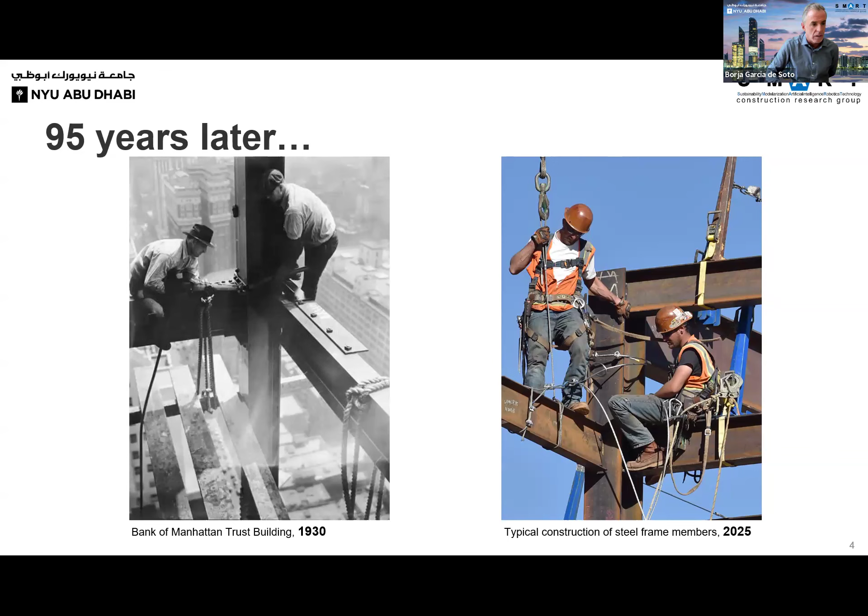We're also seeing other factors that are accelerating these changes. I guess you're all familiar with what's happening, particularly in Europe and developed places, where the workforce is declining quickly — we are running out of workers. And to be realistic, construction is not that appealing anymore. We are falling behind other sectors, and younger generations are not that interested in going to construction sites. They're very hard work environments — tedious, dangerous. So we're seeing a decline in population, but also a decline in interest.

There is now this concept about how we can modernize civil engineering, construction management, and so forth. Technology is playing a significant part, but still we need to be conscious about what the implications are in the long term and how we can compensate for that potential gap.

We're also seeing, as in many other industries, labor cost skyrocketing, and at the same time, like with most technologies, the price of technology goes down, particularly the price of robots. In the old days, if we look back to maybe the 70s or 80s, Japan was one of the pioneers of robotized construction sites. The main challenge they had was timing — it was very expensive, and the technology was still not quite fully developed to robotize, despite the efforts they had made in this regard.

So now we are in this perfect storm, or this ecosystem, where we have high labor costs and low robot prices. So now we start thinking, particularly on the construction company side, does it make sense to start looking at ways to robotize my workforce for things that could be relatively straightforward to do, like data collection and progress monitoring, for instance. That is actually the main axis of research that I work on, and we're trying to really put this into practice in real construction sites.

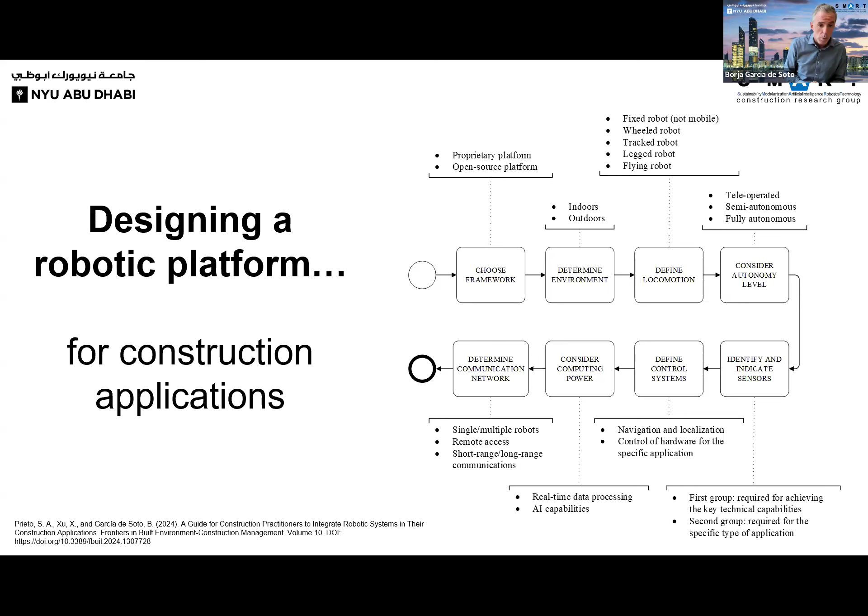It's important to have a good understanding of the complexity involved across the different levels of communication strategies you might want to consider for your platforms. So, starting with the bottom layer, we have the hardware component—we talked briefly about that. What type of platform are you going to use? Indoors or outdoors, meaning terrestrial robot versus aerial robot? Legged versus wheeled? What are the limitations regarding the current state of implementation? And what type of sensors are going to be used?

Is it going to be a 3D laser scanner that is going to be continuously registering the environment as you're moving, or do you need to predefine waypoints for the robot to go and collect data?

What about the IT network? How is this going to be connected with the overall network of the organization, with the network on site? We know there are limitations on construction sites at the beginning with regards to connectivity, depending on location, depending on the status of construction and so forth.

Then you need to integrate all that with the actual brains, if you will, of the robotic platform. Typically, we're using ROS, Robot Operating System, that allows you to integrate different elements from the actual payload that is added to your robot, in this case a 3D laser scanner, but it also includes all the sensors that are built into the robot for navigation and so forth.

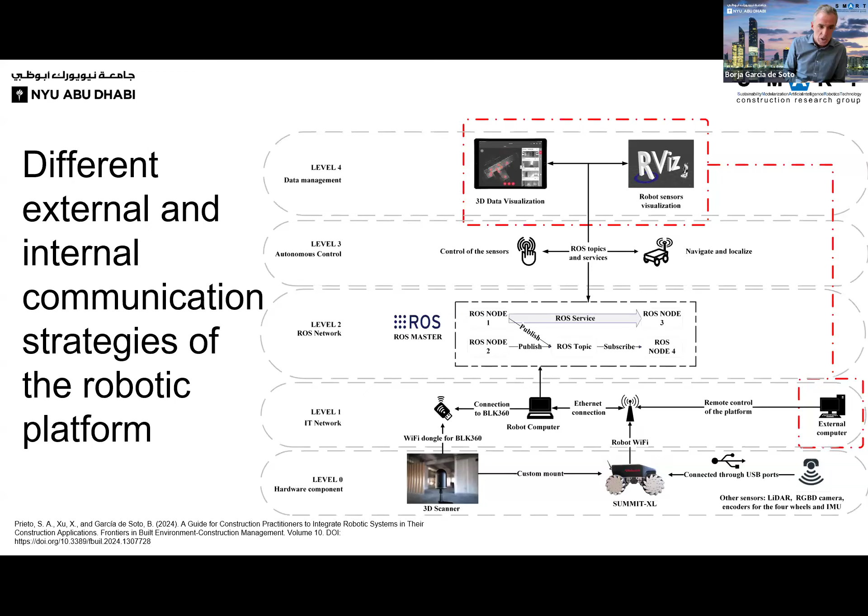So let me just give you a quick example of some of the prototypes that we're dealing with. With regards to the payload, we need to deal with both the navigation components. So we need to ensure that we have the proper mechanisms that allow us to understand the environment where the robot has to go through, but also that we have the ability to add whatever systems or equipment that can capture data that can be further processed.

Here on the left side, let me just use the pointer, maybe it will be easier. So basically we have the navigation component. We have a LiDAR that allows us to use and employ traditional SLAM mechanisms or SLAM techniques for navigation and localization purposes. We have a very modular and workable structure or framework that allows us to change things quickly. We want to have the ability to have a modular approach and add and remove payload, and by payload I mean the sensors that are required for our particular application.

In this particular case we'll be using a 3D scanner, but this could be a static one in the sense that you might have to stop and then collect the data, or you could have more dynamic ones, like this Hovermap, that allows you to continuously monitor and capture and register data. Of course, there's a trade-off with the noise that you might have to deal with later on. But the point of this is to allow you to understand that you have a lot of flexibility to modify and change your platform to complement whatever needs you have, in the same sense that you would if you had an operator or a human collecting the data in a similar fashion.

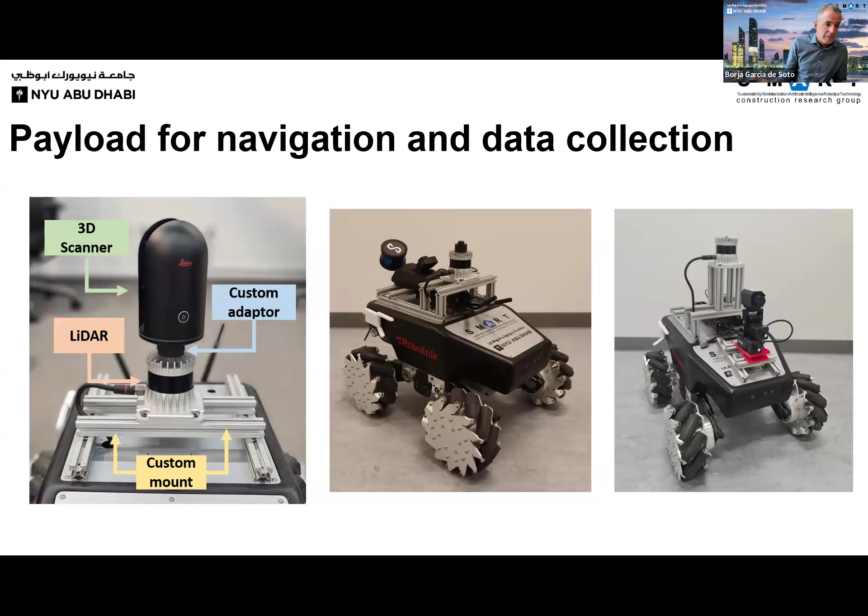With regards to mobility, this is a big challenge. You might be questioning, okay, but how is this going to navigate through a chaotic construction site where you have workers around, you have scaffolding, you have temporary structures, you have temporary storage areas? So it's not trivial to have these systems moving. Of course, more fundamentally, there are limitations with regards to mobility. And that's when we start to think, okay, are we looking at a wheeled platform?

Or we look at a legged platform, right? You can see the advantages and disadvantages of each. Here on the left, the holonomic platforms allow you to navigate very narrow spaces. The rotation perspective is relatively phenomenal, but you cannot climb stairs, for instance, or you might not be able to interact with the environment, like in the case of the image on the right, where you have a robotic arm that you can use to move things around if needed.

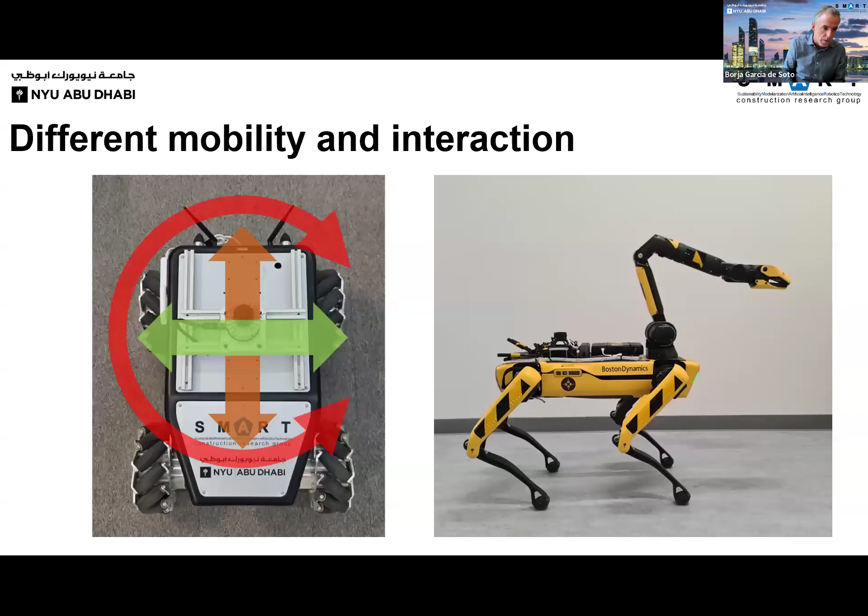So you can think of these platforms as additional workers, as I mentioned before, each with their own skill sets and abilities. In this context, you can start thinking of multi-agents, the same way you go about defining your crews, defining the type of task you're going to be doing, and then selecting the team members for data collection, surveying, monitoring, whatever it is. You can put it in the perspective of calling them agents, and try to see how we can integrate and create these systems.

So you have these multi-agent systems that, for example, in applications for inspections or project monitoring, you can customize and define the different agents depending on the payloads you're interested in. For example, Agent 1 will be able to collect data through a laser scanner. Agent 2 will be able to interact with the environment as needed, remove obstacles, and facilitate the performance or mission of the other agents.

And of course, another agent could be us, could be humans, right? We are not going to be completely replaced yet. We need to be in the loop to ensure that whatever these other agents are doing, similar to a manager perspective, we provide the final decision about the process. All this needs to be integrated and properly communicated, and this is also when human-computer, human-machine interaction starts to become important - not only understanding the capabilities and skills of the different agents, but also the payloads and the different equipment and sensors they are dealing with for particular applications.

Let me show you very briefly an overview of how this would look like. We are currently doing experiments to investigate the use of exploration algorithms, in the context of how we can navigate environments without a lot of prior knowledge, and how we can use this in a multi-agent configuration where each agent has a specific mission to accomplish.

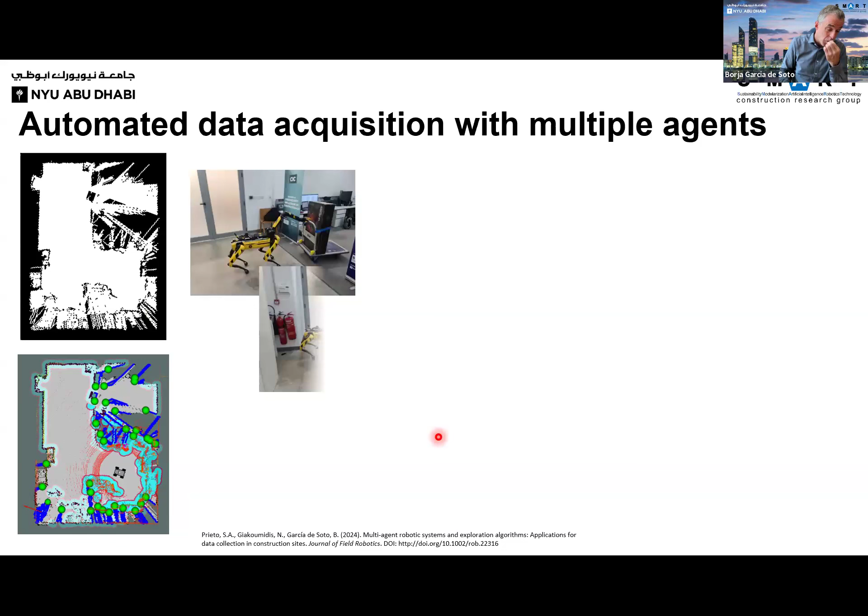At some point, this robot's mission was to map and digitize the whole environment in 3D, but there's an area it cannot access. So without any human intervention, you could have another robot that would help understand what issues this robot is having not accessing this space, have humans confirm what action needs to be taken, and then go assist the robot, remove the obstacle, so this robot can communicate, provide complete information, remap the environment, and achieve the final goal, which is a 3D representation using a laser scan.

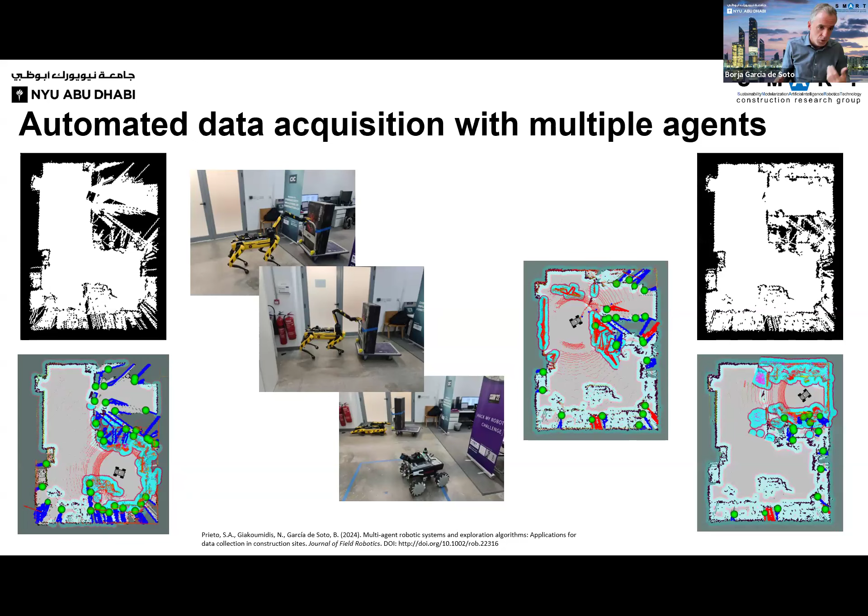I will show you a quick video of how this was done. This is in a controlled environment. We have a paper published on this, so if you're more interested, you're welcome to take a look at it. I will quickly run this video, see if it works.

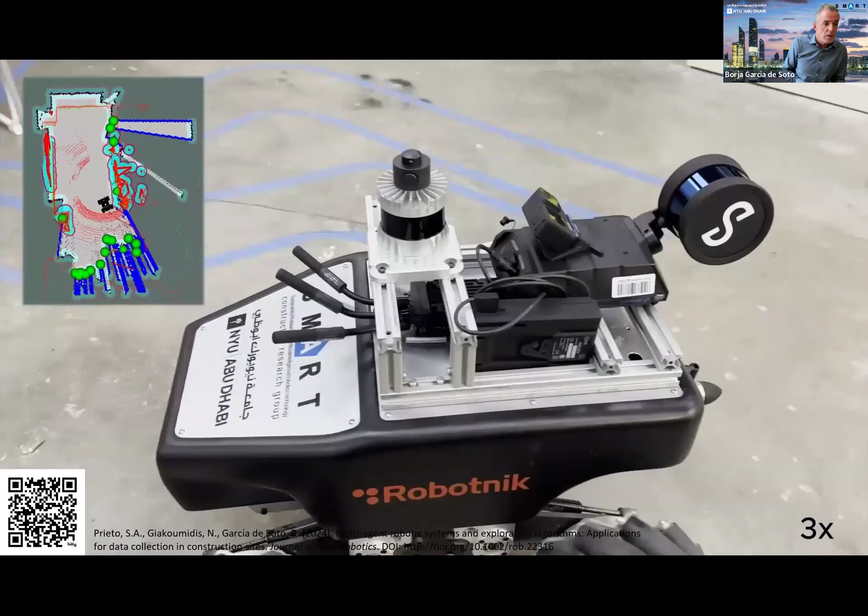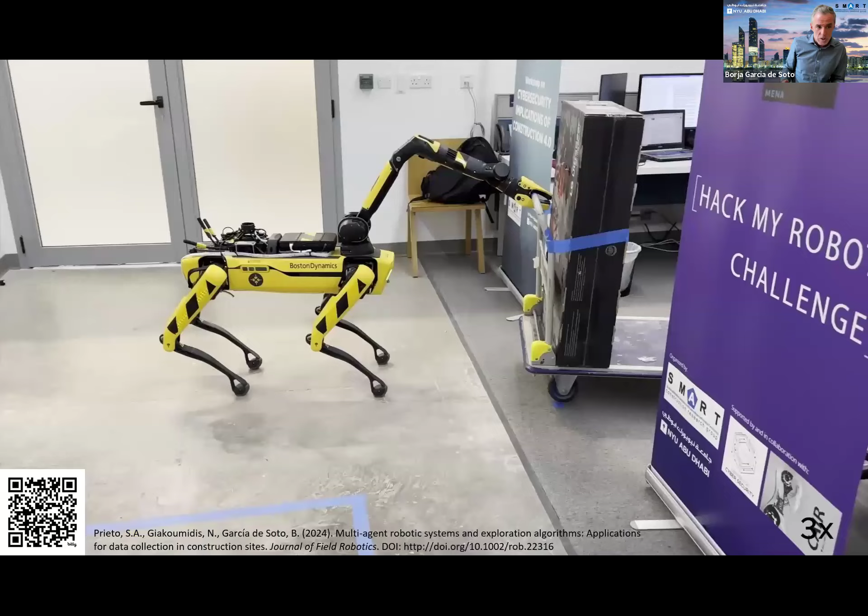Here you can see the robot. This agent is specifically designed to get the point cloud data. At some point, it reached all the spaces that were able to be reached. However, it was not a completed mission yet because the complete area was not finished.

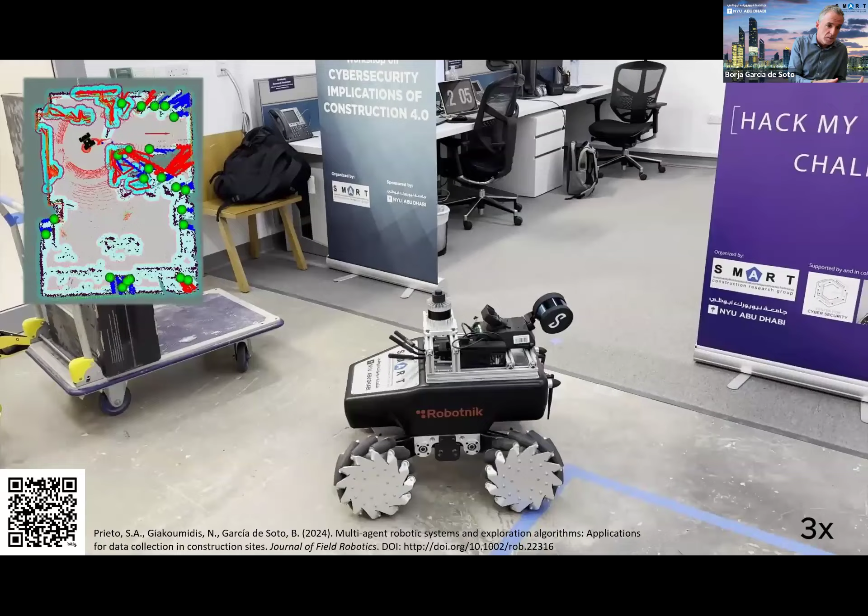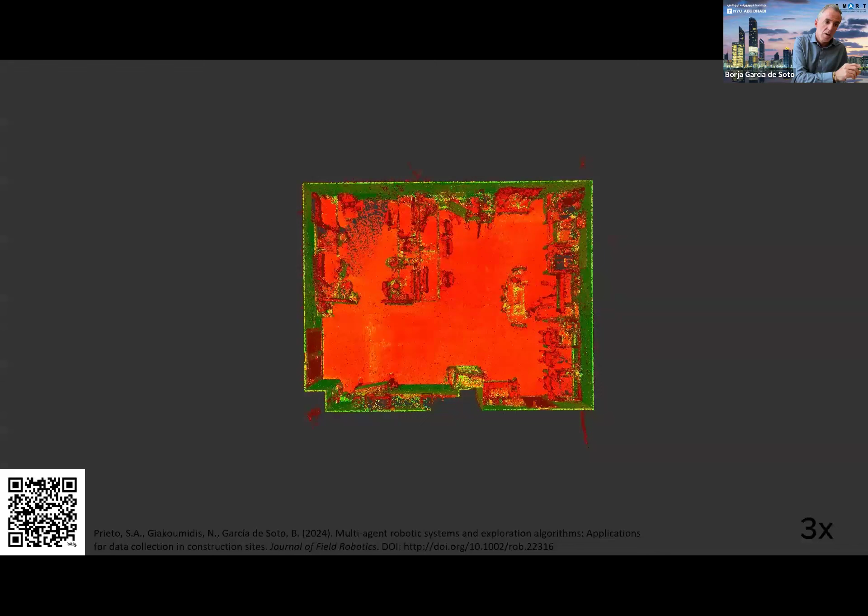What happened there was that it communicated with the other robot that had the ability to interact with the environment, and that robot was sent to the location where the obstacle was placed. A human remotely, in the same place or a different location depending on connectivity, was able to confirm and provide commands to the robot with the robotic arm to interact with the environment, move the obstacle, provide information to the other robot to complete the mission, and then that robot went back and remapped the environment, completing the assigned task.

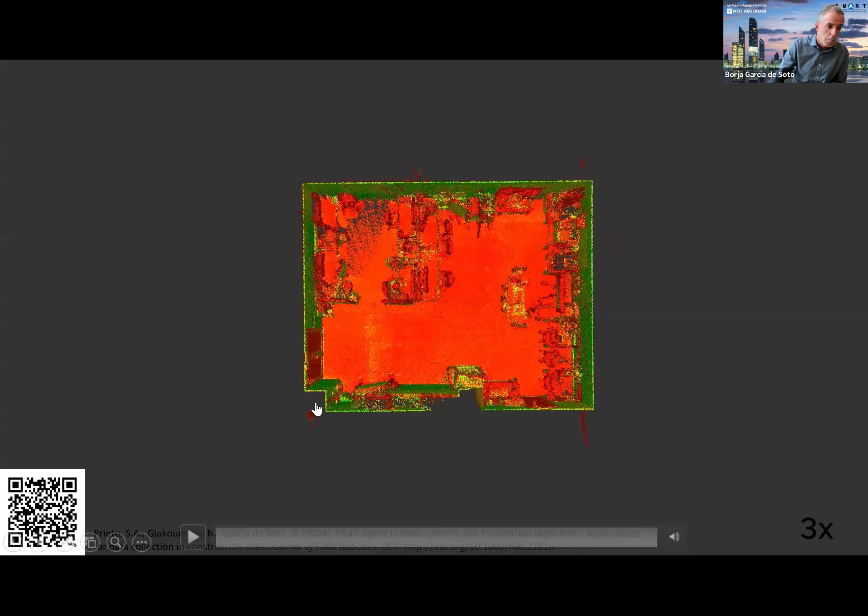The final product is to get the point cloud in a semi-autonomous way, in the sense that you might still have some human interaction, but the navigation and communication will be mostly achieved autonomously by these systems. This point cloud can then be further used and analyzed for whatever purposes, comparison to a plan, a BIM, or anything else you might think of.

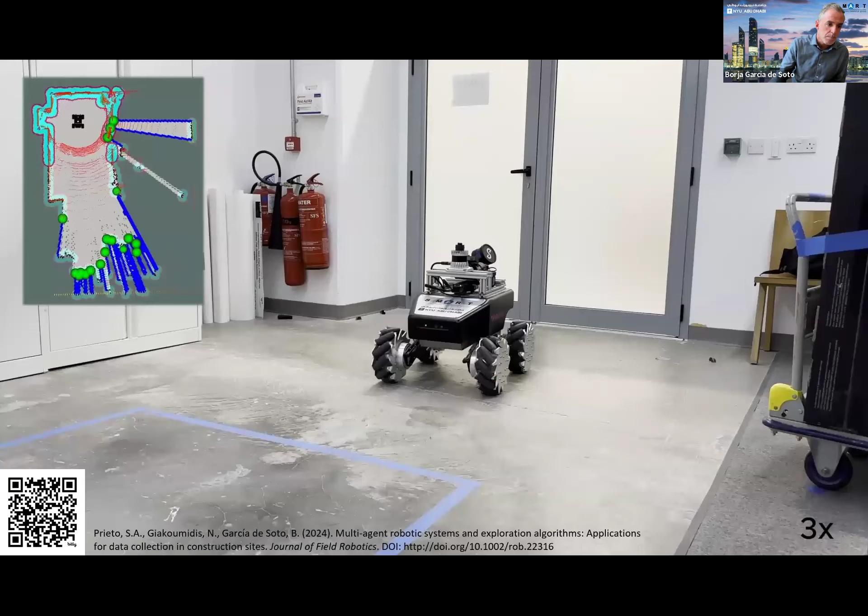As I mentioned before, we're lucky here to use real construction projects to test our systems, and this is one of the most important parts for us. I'm happy to see interest in general from industry. In particular, I'd like to mention ALEC Construction - one of the big developers in the region. They have many projects in Dubai and Abu Dhabi, and are expanding to Saudi Arabia and North Africa. The ability to go out of the lab into a real site is when you really get excited about the challenges you'll face.

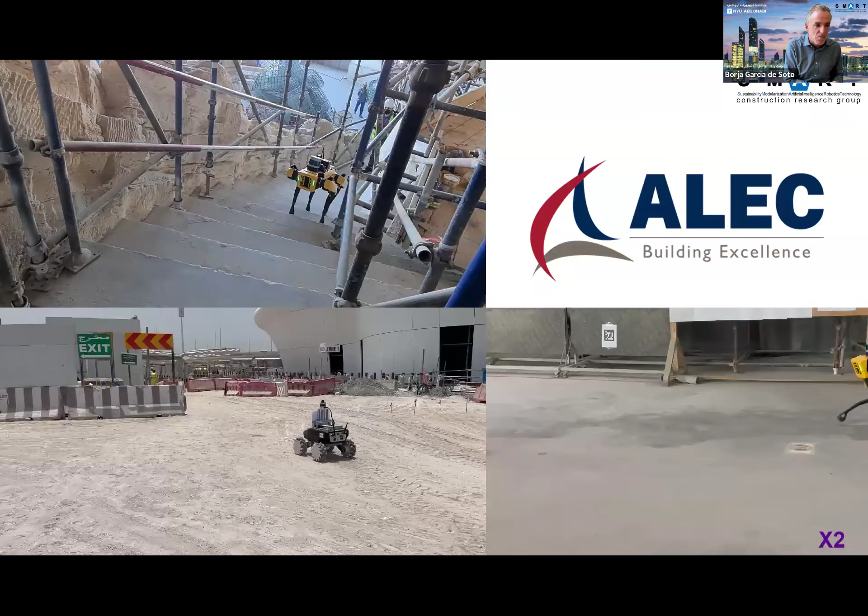What are the issues I didn't think I needed to consider? It goes from very silly things, like the configuration of scaffolding changing from project to project messing up the recognition algorithms for navigation, to navigation being facilitated with April tags or markers on site, which isn't practical because of the changing nature of projects during early phases. Then there's going up and down stairs, around obstacles, and dealing with extreme weather - it gets particularly hot in the summer here, which affects sensor readings and battery life. All these things you start thinking about once you're outside of the lab.

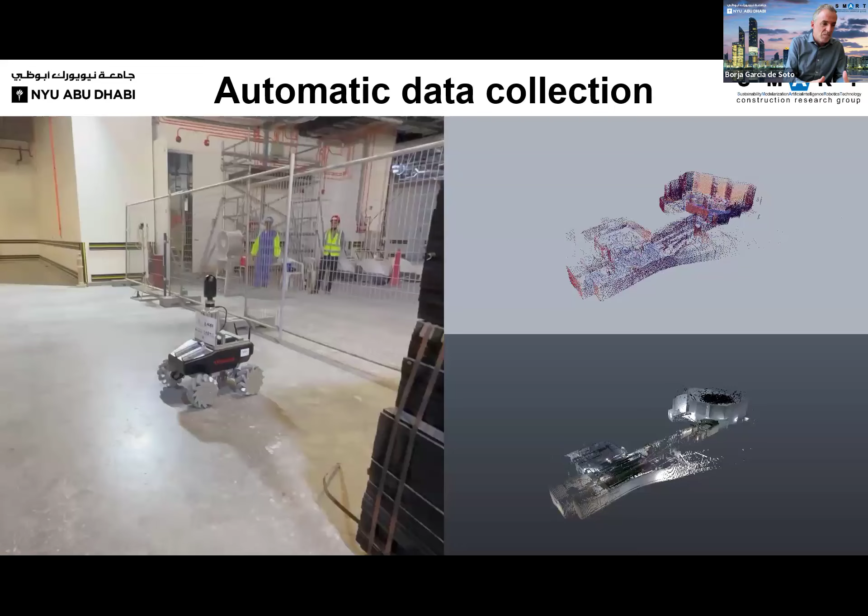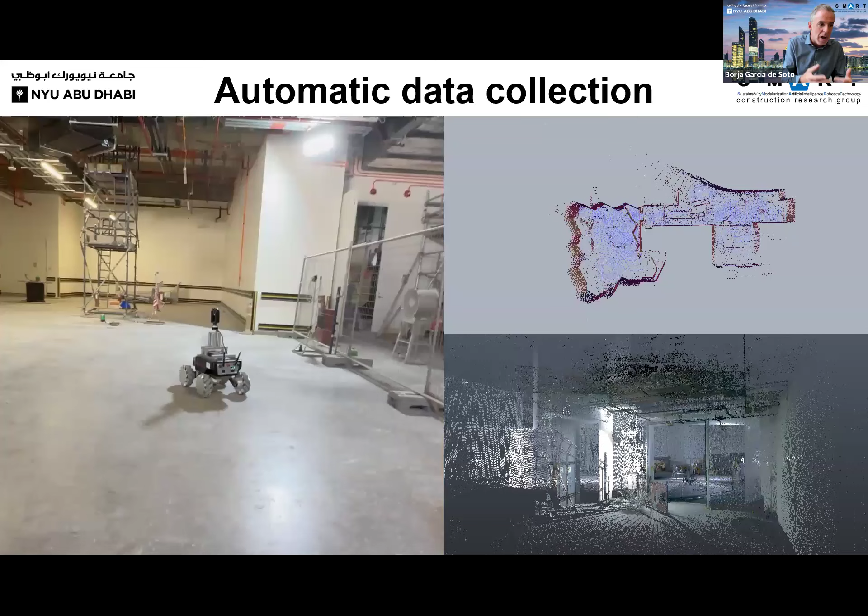Some basic applications - translating this information and technology to construction is not trivial. We need to first show the value, convince people this has potential to improve frequency, improve accuracy, and remove bias from human operators. At the end of the day, you're able to gather data you'd get anyway, but ultimately, in the long term, keeping economies of scale into account in a more cost-effective and efficient manner.

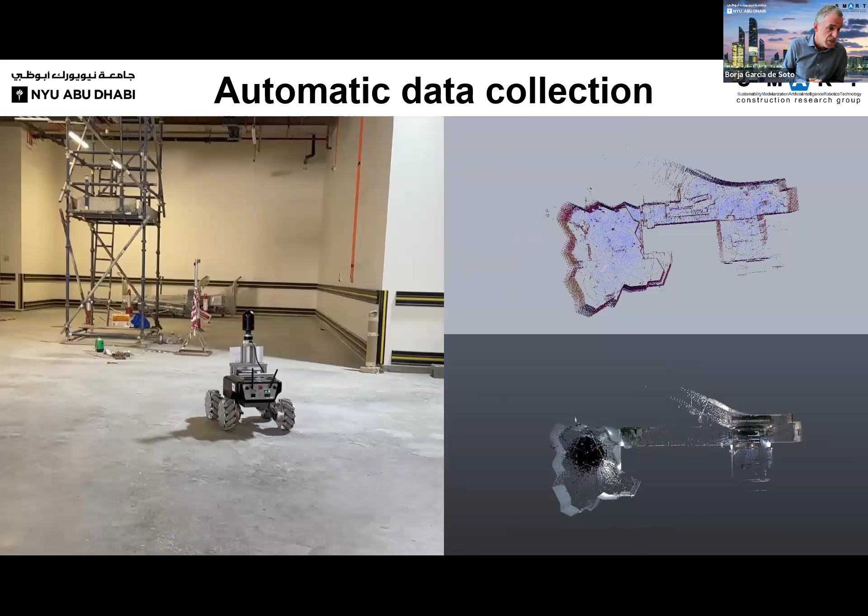Other things we need to do is fully automate the processes. It's not just about navigation, which has typically been addressed. We need to deal with construction settings specifically, which are not trivial, but also how we can integrate the payload, the sensors we want to use. We try to remove humans from tasks and put them where they really add value: in data processing, data analysis, and data management.

We can do this through integration, for example, the BLK 360 integration with ROS. Once the robot achieves a specific location, it triggers a command to take a scan and move to the next step, and so forth. We go through ROS network integration, saving and integrating commands and nodes through APIs provided by manufacturers, then provide those commands to initiate the scan.

The scan can be configured based on the characteristics of the equipment, with regards to density and the type of information you need—this could be RGB data, thermal data, whatever is needed. Then how that data flows back into your network and is ultimately stored safely so you can further analyze and use it for whatever applications you're dealing with.

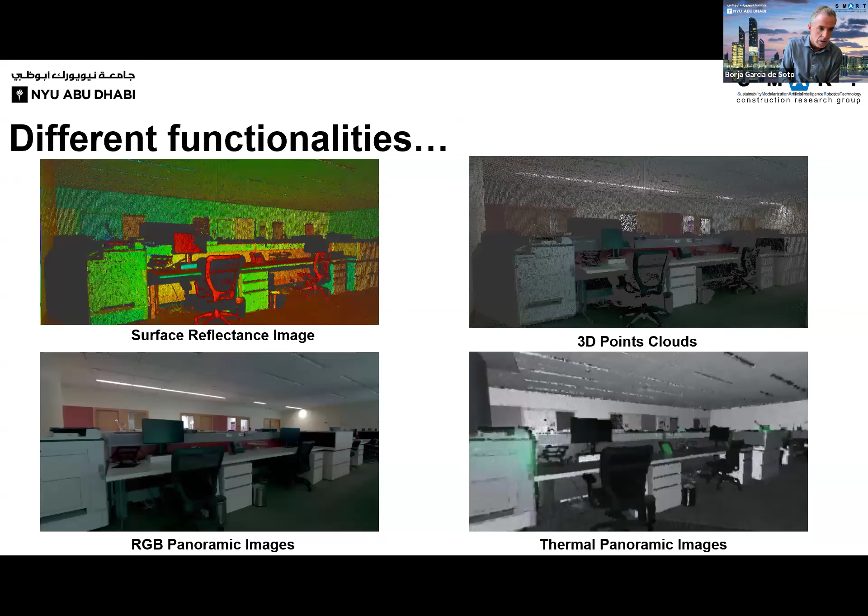You're all familiar with the types of things you might get, and as I mentioned before, this is just an example. You need to think about the main steps: data collection, data transmission, keeping in mind security. We want to ensure the data is securely transferred with no opportunity for tampering, though this would be true for any application.

And then how you can visualize this data in real or near real time. This is important because once we deploy these autonomous or semi-autonomous systems, we want to ensure they're collecting all the data you need efficiently. If not, you get red flags that maybe an area wasn't covered enough—you might have to send another surveyor or robot to that location, or the quality of information wasn't sufficient. So you want a dashboard for real-time visualization of the data you're collecting.

And of course, data storage and further processing. I'm not sure if I'm going too fast or covering too much, but I want to now get to some specific applications.

I'd like to show you an example of how we're trying to use this for quality control in formwork systems. It's about how traditionally this is done in the region: you have a formwork system with detailed drawings about shop and installation processes, and typically an inspector checking that studs or components have been properly installed before concrete is placed, to ensure it won't fail and will have the necessary integrity during curing.

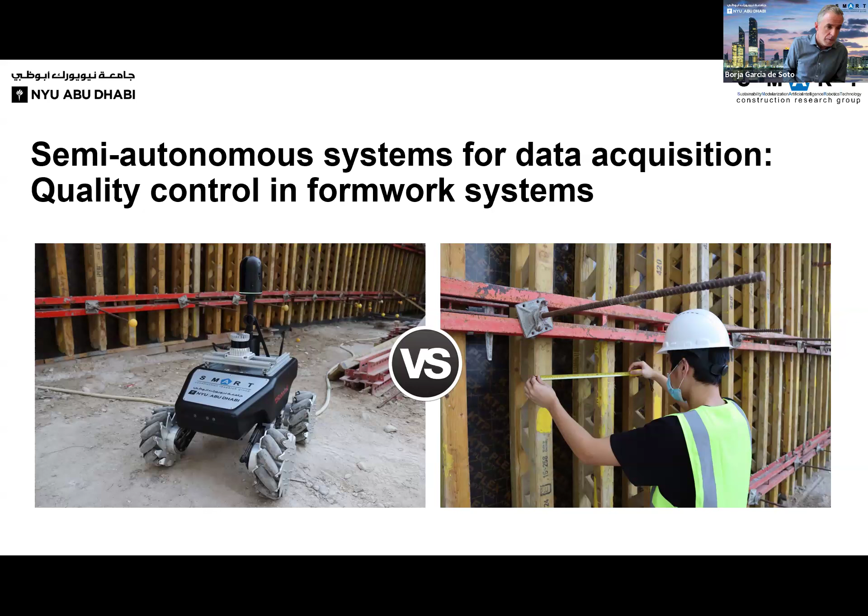So we compared this with how we could use autonomous or semi-autonomous systems with the proper payload. Here you can see a 3D laser scanner that lets us scan the place, which we can later process through different techniques. This is beyond the scope of this presentation, but I'd like to show you a bit of the outcome.

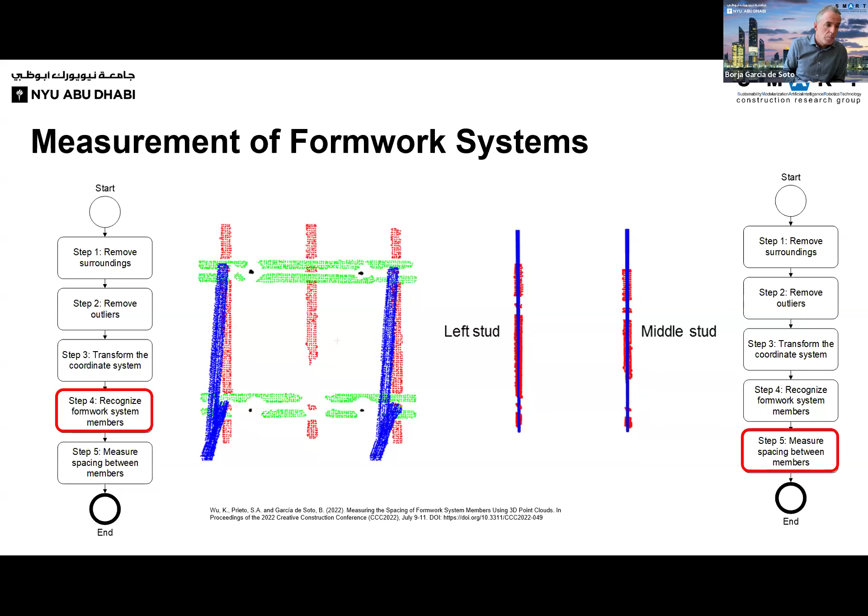You get the robot on site, take the scan, and then process it by different methods. This is just one example that lets us identify different members, classify them, provide proper identification, and then conduct measurements that can be compared to measurements done traditionally with a measuring tape and gauge, to assess performance and value.

We need to add the dimension of timing: how long it took to set up the system, how long to take the scan, how long it takes a human to do the same task, then do a cost comparison, but also look at the social perspective—what does it mean for the inspector, what is the inspector going to do if the robot is doing this, and so forth.

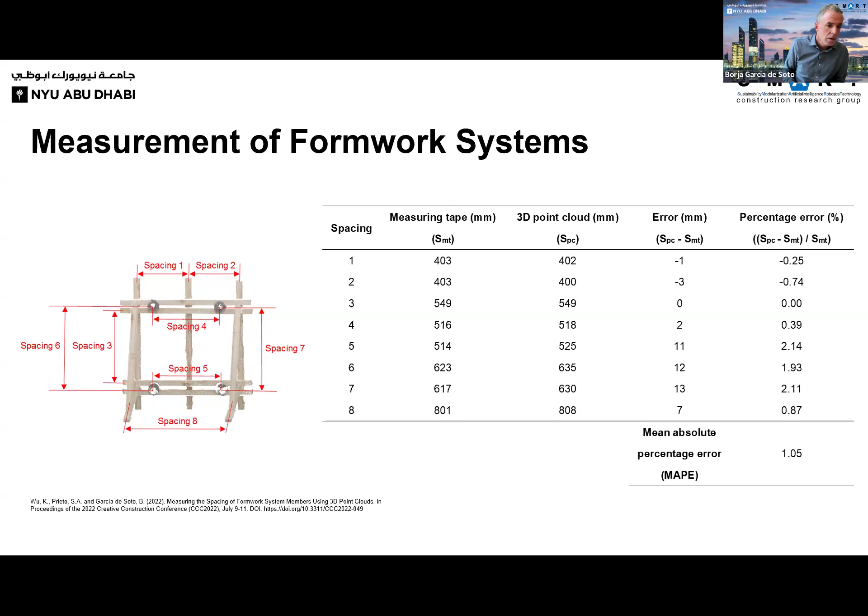Another application was on safety cases. We wanted to use this system, but we didn't employ the point cloud data here. Instead, at the front of the robot we have a 360 camera that was able to collect data and images on a regular basis. We have a base condition about the type of barriers you might expect, like a full board barrier in a staircase setting.

This is simulating basically an opening in a construction site that we want to protect workers from falling, with different possible configurations of improperly installed barriers. Then we can use this data collected from the robot in real time, through models developed using computer vision, to identify

dangerous or improper installation of these barriers, for example. So just to put this into perspective: starting from the definition and design of your platforms, what type of payloads you can use, how you can integrate multiple agents to collect data and augment what inspectors and human surveyors might be doing, and then how you could further process this data into practical cases. You have many opportunities and still many challenges.

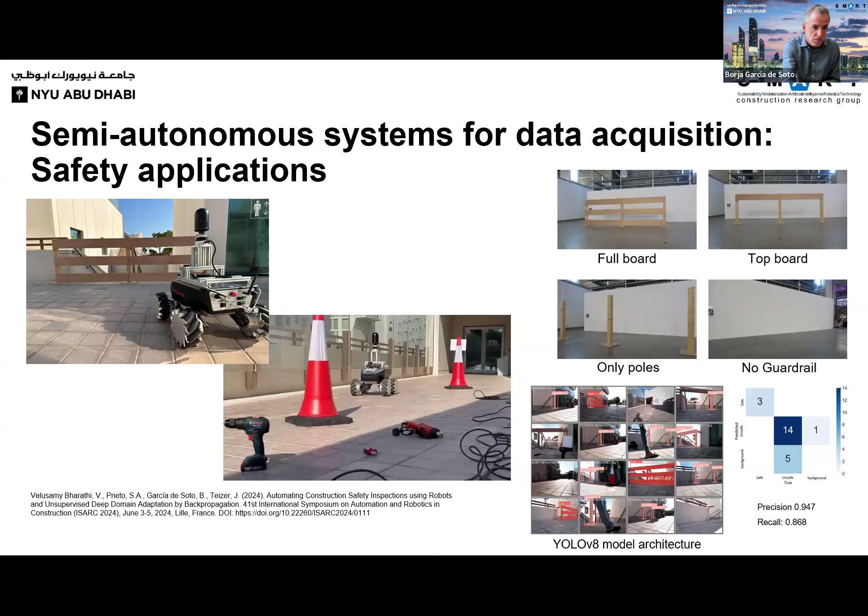I want to emphasize how we can make this technology really accessible for construction. This is one of the main challenges we're seeing. When we go to a contractor and say, okay, we can robotize some of your tasks and you'll get real benefit, they say, well that sounds great, but look at my crew—they have no clue about robots. How are we going to be dealing with robots now? We have to deal with all these things you're talking about, ROS and all this coding. So this is not going to work.

So how can we close the gap and ensure that non-skilled personnel can interact with robots in a way that facilitates and enhances the performance of the projects overall? If you've seen the developments of large language models lately, and in particular multimodal large language models that let us process data, images, text, and voice—this is really a game changer in human-machine interaction and collaboration.

We're moving in this direction because we believe it's the next step toward fully integrating these technologies into construction operations, given the many limitations we need to deal with in real settings. But this is a very good opportunity, and we've been experimenting with cases that allow common conversations between humans and robots.

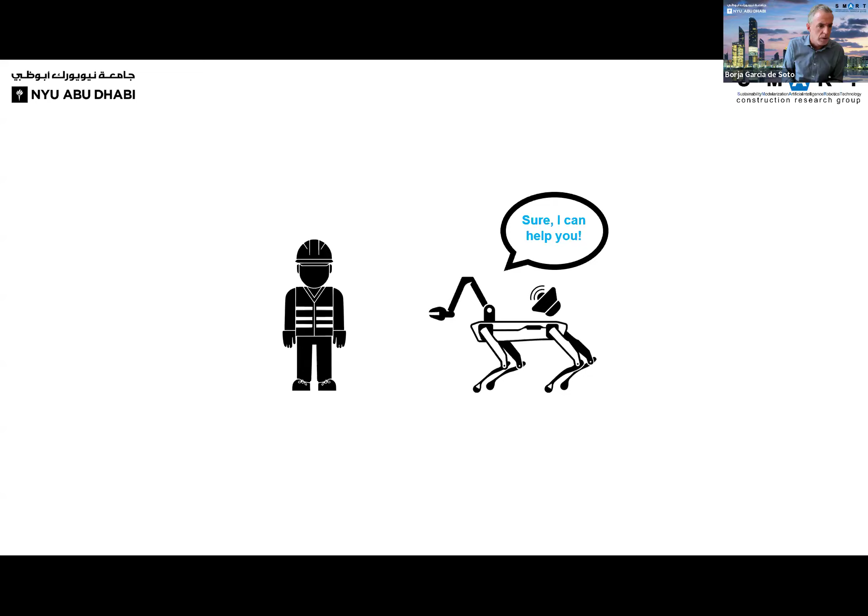But you have the full process: you go from speech to text through the large language models, then text to voice, and then the robot is eventually able to process that and communicate back to you—a more informal communication, without the required skill sets that would normally be needed in the background.

So this is a high-level view of how this interaction would look: you have the ability to speak to the robot, then the different multimodal levels I mentioned—speech, text, and vision—and then how you close the loop and provide this interaction in an intuitive way that allows construction workers to interact with robots.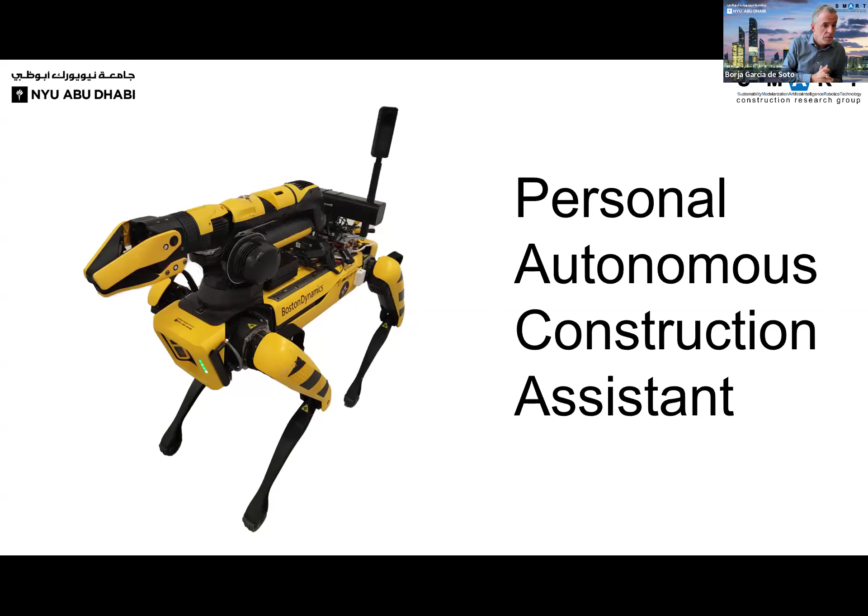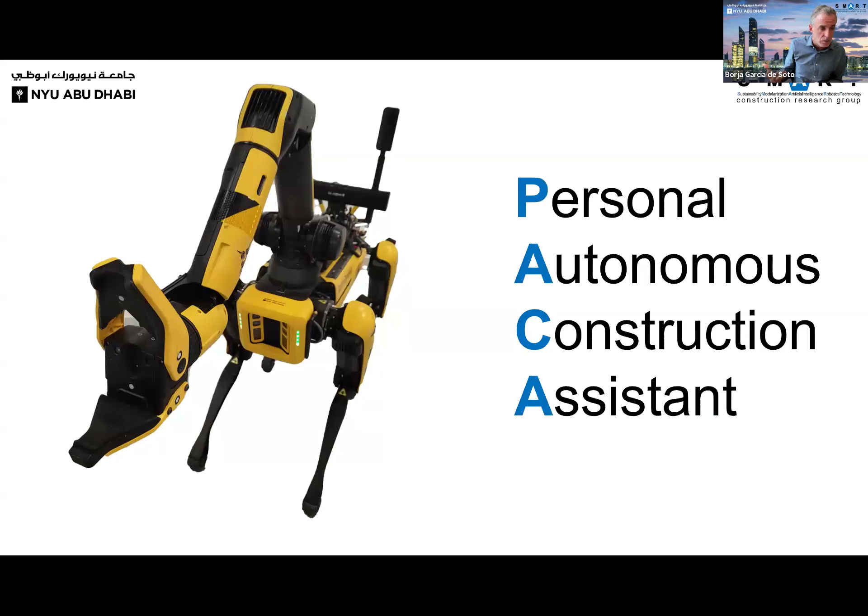We're working on this project we call PACA, a personal autonomous construction assistant. We have a number of sensors and payloads installed in this particular case. This is mostly meant to provide support and tools to construction workers. On one side, we have to equip the workers with the right ways to communicate.

In the context of construction settings, these are typically very noisy and unstructured environments. So we have this kind of on-demand communication—you have the ability to interact when needed. This also makes sense, so the robot isn't collecting information all the time, but once you engage with the robot, you have its full attention and can interact on a one-to-one basis.

Also, many of these models are multi-language. You could be in a region where it's very common to have people from different places speaking different languages on site, and communication is an issue. This multi-language application allows the robot to understand you and reply back in the same language, no matter what language you speak.

With regards to the robot application, we have different payload that is being customized. We have a Jetson AGX for the development and deployment of the systems on the robot, so we don't have a cloud component causing latency issues. We also found many places where we could not use it because we didn't have a reliable connection.

As mentioned before, we're using 360 cameras as payload to collect data for progress monitoring, and this could later be imported into different packages or platforms.

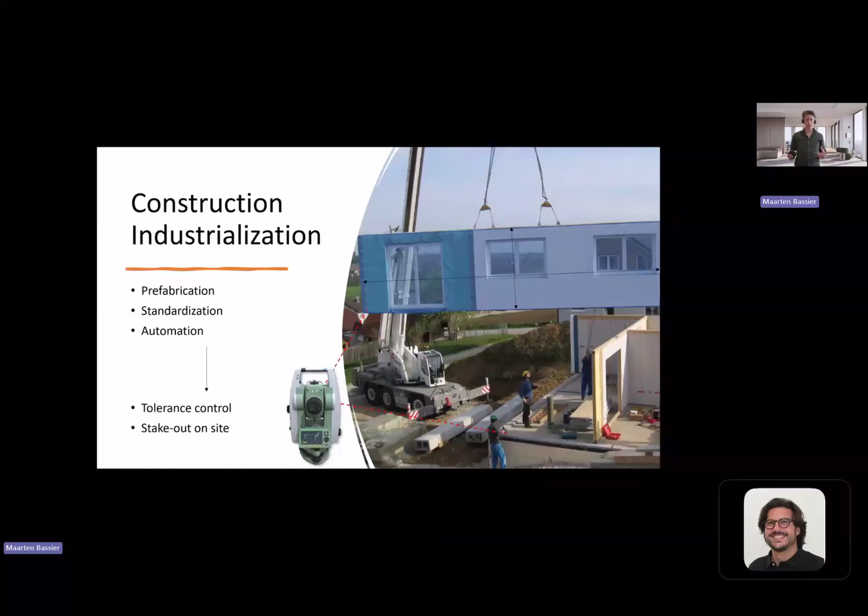If all three conditions are met, we will facilitate tolerance control, and specifically the stakeout on site. This is currently done using total stations, but it can be made more repetitive if we have a prefabricated, standardized, and automated procedure in place on the construction site.

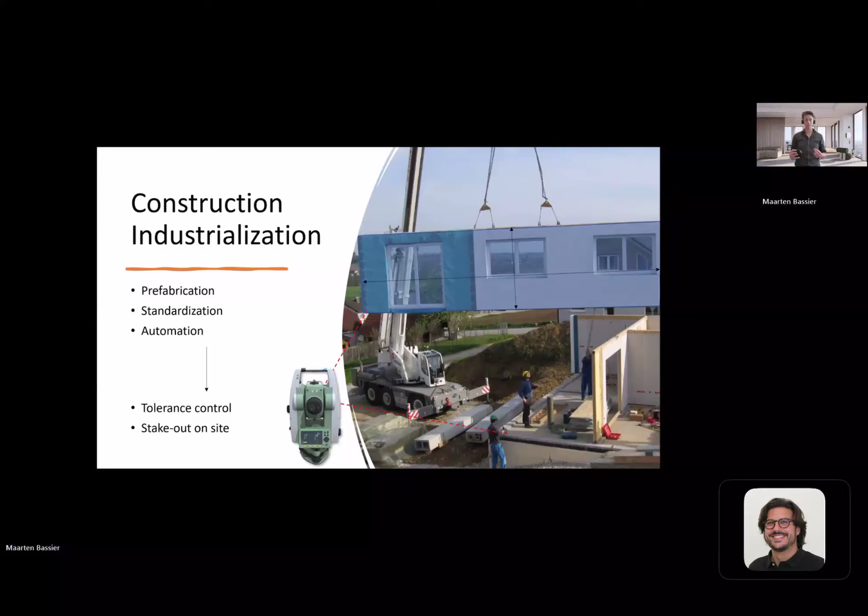Now, the second aspect is construction digitalization. This digital twinning through the use of building information modeling and its exchange format IFC. I already mentioned the database of tens of thousands of elements that we need to use with accurate texture and geometries instead of our conventional PDF plans.

Now, aside from this BIM database, we also need to extract information from the building process. This BIM process, for instance, in the form of lean methodologies, have detailed plannings that we can use to lower the computational complexity of identifying and matching observations with certain objects. Very concretely, we don't want to identify and evaluate observations with the entire database, but focus specifically on the relevant objects that are being constructed at a certain stage.

Now, before we commence construction, these optical techniques can already contribute in the form of as-is measurements of the site as a whole in order to compute clash detections and avoid costly failure costs compared to the original design.

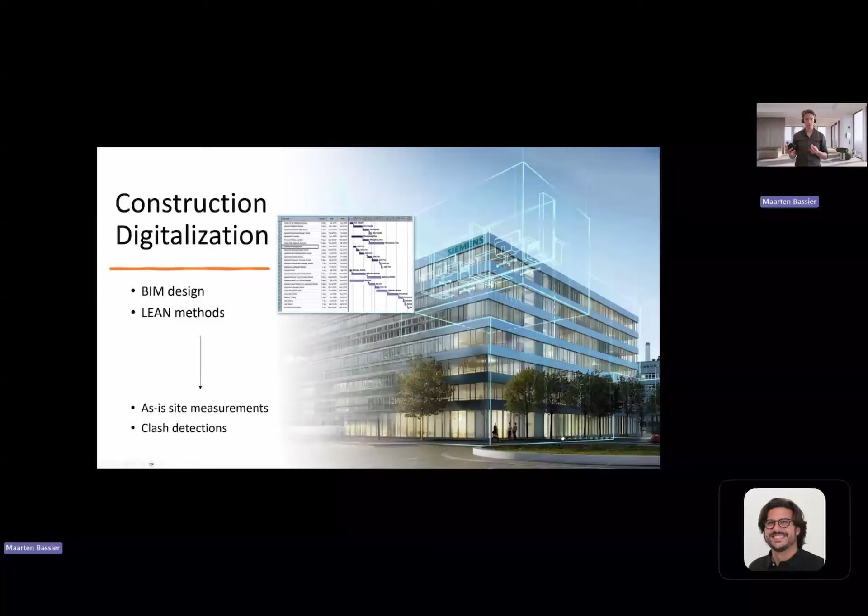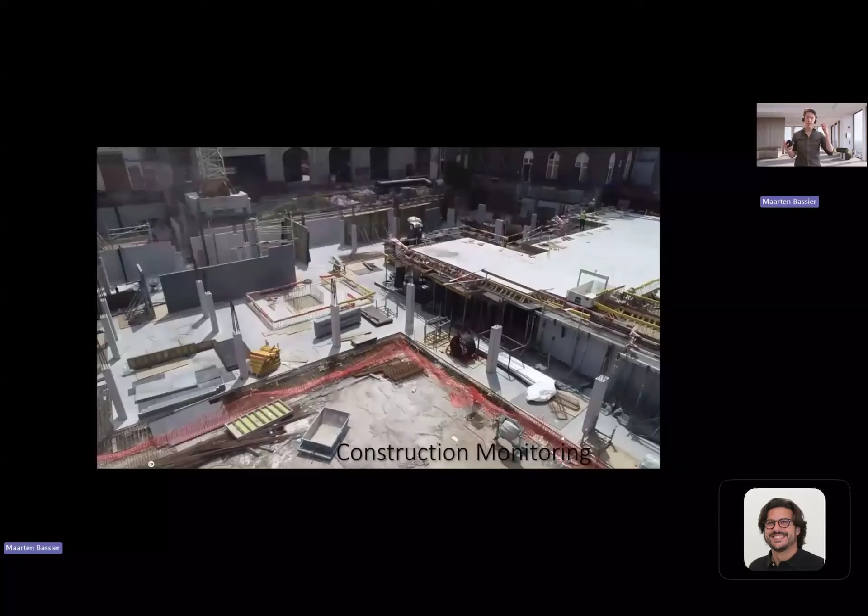The third and final aspect is the key topic of this talk, namely the construction monitoring itself. The capture of optical data on your site, either in the form of imagery or LiDAR information from aerial or terrestrial vantage points, and the calculation of certain parameters from those observations.

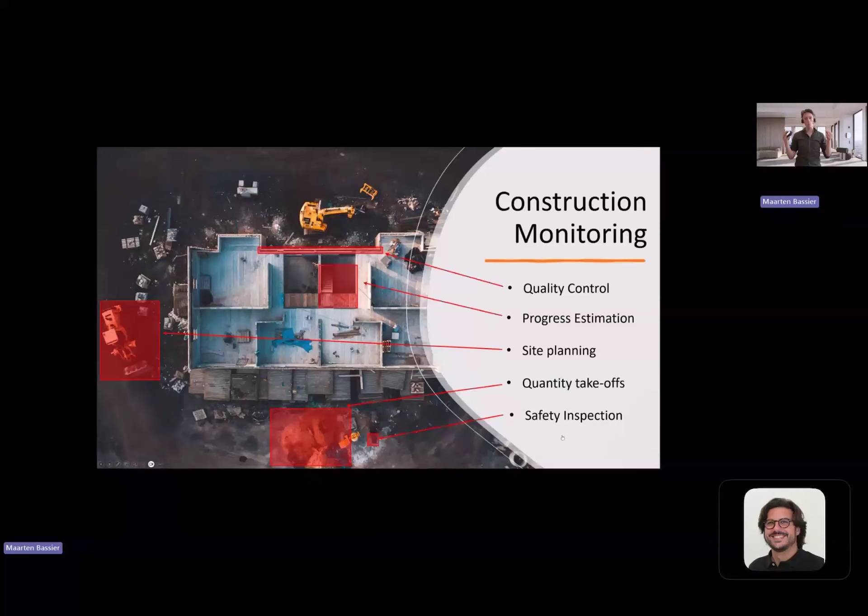Specifically, we will discuss the extraction of quality control information or tolerances, progress estimation, which can be binary or more complex, in which that reports the state of the construction, the site planning, quantity takeoffs, and finally safety inspection, which is a little bit more of a niche, but there are opportunities with remote sensing or optical data to automate these tasks.

Overall, there are three parameters to consider. First of all is the coverage of the site, namely how many pixels or points are used to cover certain objects. That specifically can be translated to the percentage of coverage compared to the theoretical design of objects.

The second aspect is the accuracy of the observations. Specifically, laser scanning will be more accurate than photogrammetry, but might have a lower coverage. And then finally is the timeliness of these observations.

Nowadays, we're seeing plenty of opportunities for drone-in-a-box solutions where we have daily flights of construction sites using UAVs, but also tower crane cameras can provide very timely measurements of ongoing operations. Instead, LiDAR typically is less frequent, but then, of course, is much more accurate.

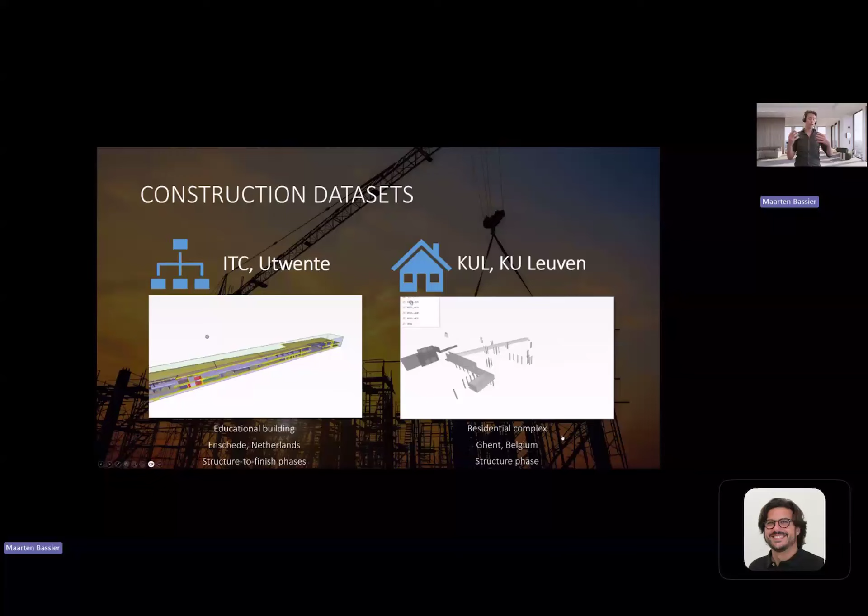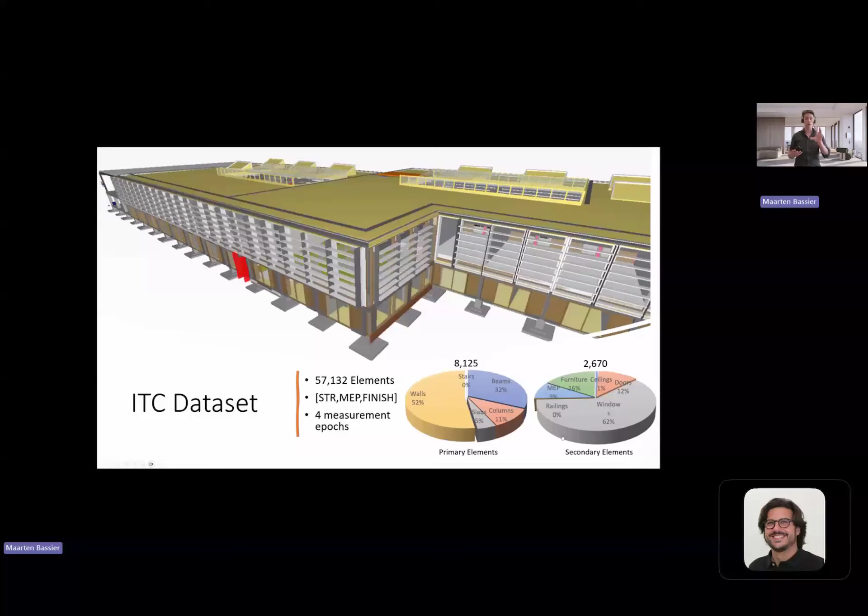The first data set is the ITC construction in the north of the Netherlands in UTwente, captured by the Geomatics group over there. It consists of close to 60,000 elements covering the structure, MEP, and architectural finish of that building. It was captured in 4 measurement epochs, and it has about a 3:1 ratio in primary compared to secondary elements.

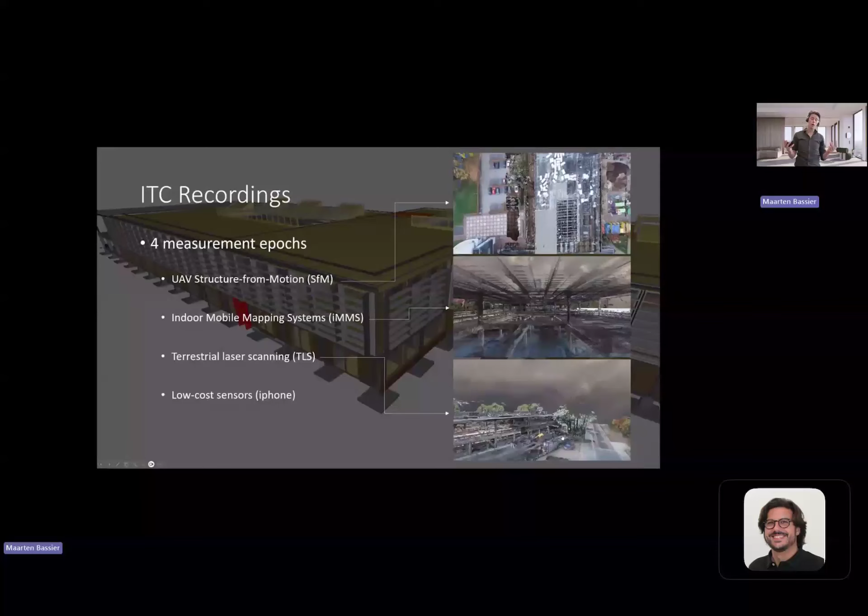If we take a look at the overview of the ITC recordings, we actually captured UAV structure from motion data, indoor mobile mapping system data, or IMMS, terrestrial laser scanning, or TLS data, and finally also some low-cost sensory data with an iPhone and a depth sensor to compare to the high-end sensors.

Now, if we take a look at the data coming from these 4 epochs, we see big differences between the different capturing methodologies and systems. For instance, the structure from motion pipeline quickly generated over tens of thousands of images in only 4 epochs. However, this is absolutely dwarfed by the LiDAR data, which is about 450 million points with the IMMS, and 3 times as much, having 1,500 million points with the TLS data. This building in the structure phase could be captured by about 150 scans, which is about 3 days worth of scanning, indicating that the timeliness of LiDAR data and also the cost to perform these measurements is quite high.

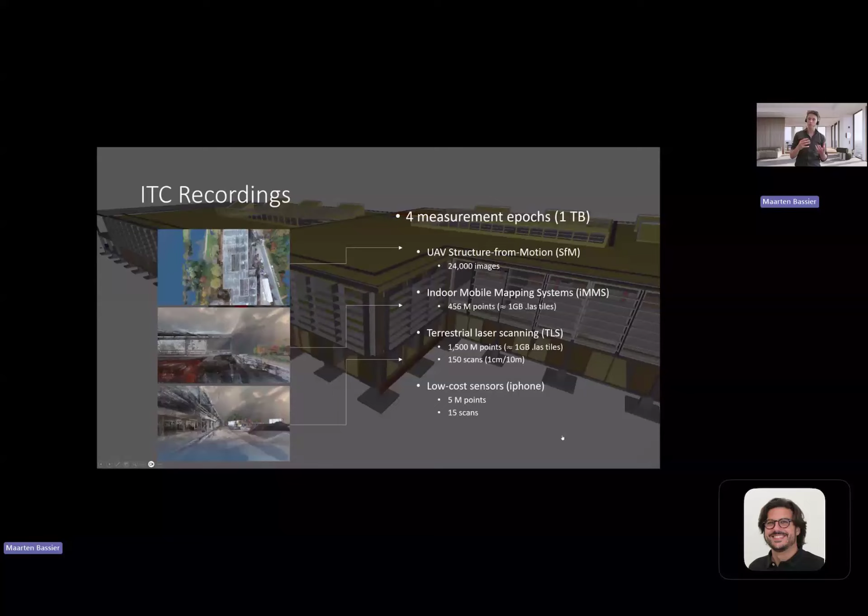Now, the low-cost sensory data is obviously only 5 million points, but this was only a limited test case and cannot be used for the full structure.

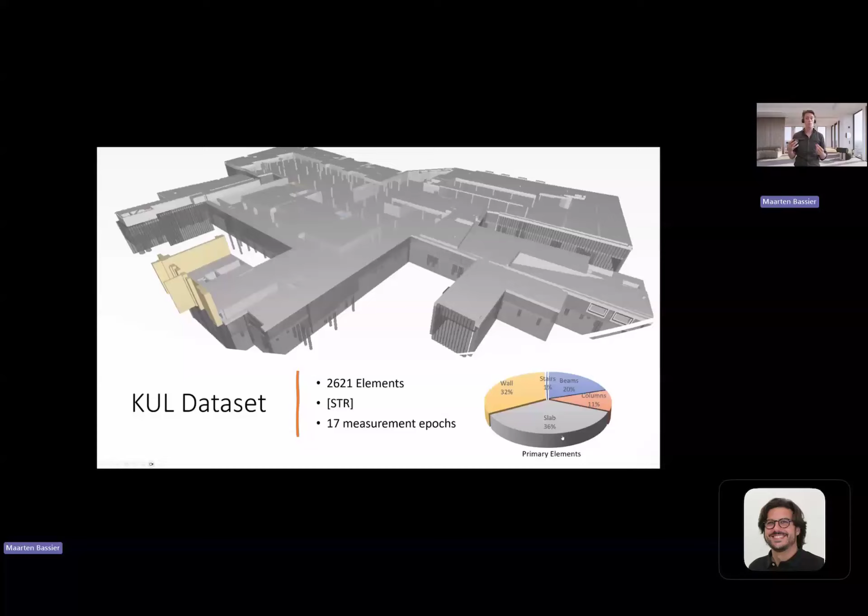The second data set is captured by KU Leuven in the city of Ghent. It only contains the basement of an apartment complex and is limited to elements in the structure phase, which has about 2,600 elements. However, it was captured over 17 epochs, ranging all the way from the foundations to the finishing of the basement and starting with the upper construction of the apartment buildings.

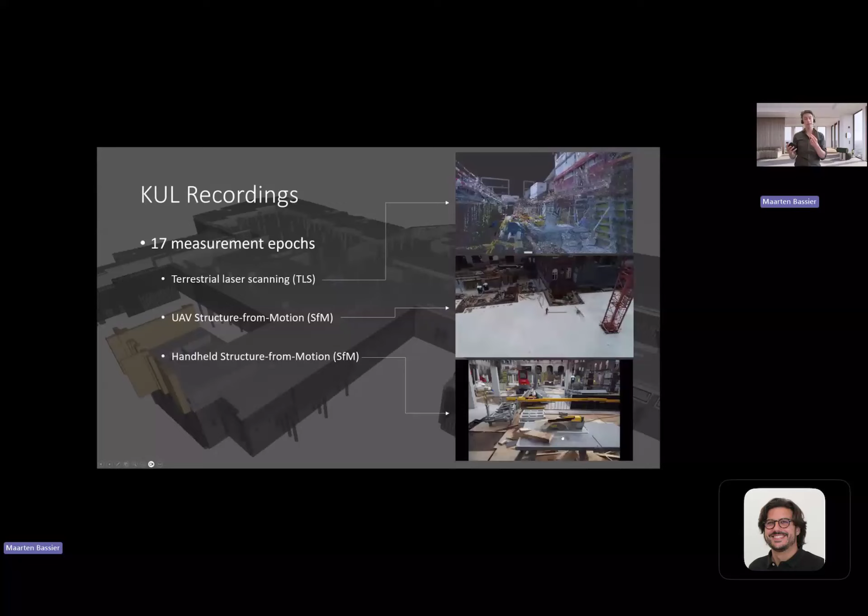If we take a look at the data there, we again see that we used TLS data to capture the sites typically once every month, and we paired this with UAV recordings and handheld imagery using a DSLR camera to perform photogrammetry aligned with the laser scanning during these 17 epochs.

Now, if we take a look at the data, we again see a massive number of TLS points, namely over 2,000 million points or 200 scans with an average of 12 scans per construction epoch. This means that we didn't capture the full construction site, which is economically unfeasible, but only captured the parts where it was being worked and relied on the static environments, namely the areas where they didn't work, to co-register the data to previous epochs in order to efficiently capture the full site.

For the structure from motion, we again see about 2,000 images per flight, or 17 flights, which is also paired with the handheld structure from motion, which had a total of 11,000 images over these 17 epochs.

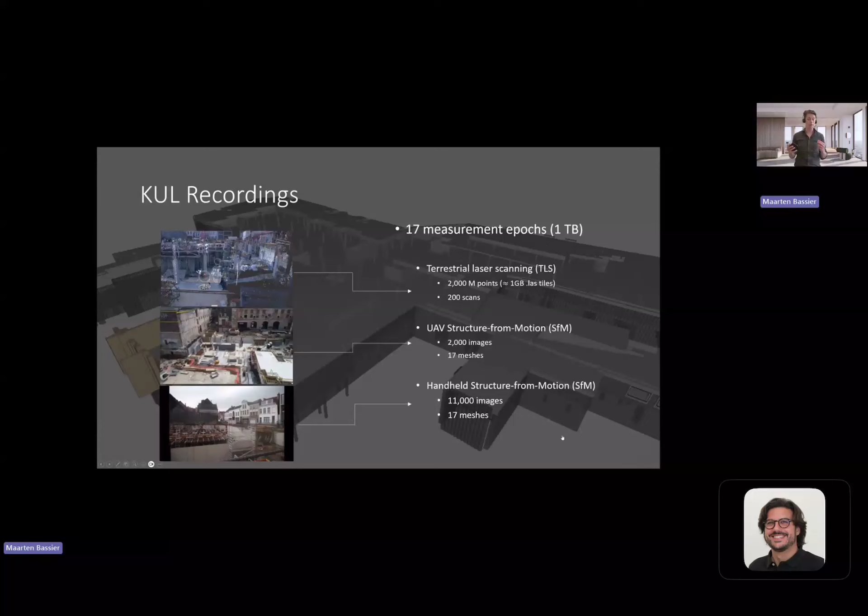Now, how do we spark innovation for the previously mentioned tasks, namely the quality control, progress estimation, site planning, quantity takeoffs, and safety inspection? Now, specifically, we need to take a look at the key obstacles behind these tasks in order to allow them to be automated more successfully.

Specifically, we will be hosting 6 open source benchmark competitions that focus on the alignment accuracy of the information, the reconstruction or the depth estimation from photogrammetry and LiDAR, the progress estimation and quality control itself, because we feel that this can be directly computed from those data. And then finally, a semantic segmentation and object detection on site, which lay at the basis of many of these tasks.

Let's take a look at the alignment accuracy. In fact, we can see in our data sets and in the industry as a whole that a number of images cannot be co-registered correctly in the coordinate system. And if they are not co-registered, they cannot be used for the downstream tasks, such as progress monitoring.

In fact, only 65% of our imagery in these datasets are registered correctly, with handheld and low-cost sensory being the most impacted. In fact, of the remaining imagery, which account for 37,000 images, we are still looking for methodologies to more reliably align these datasets.

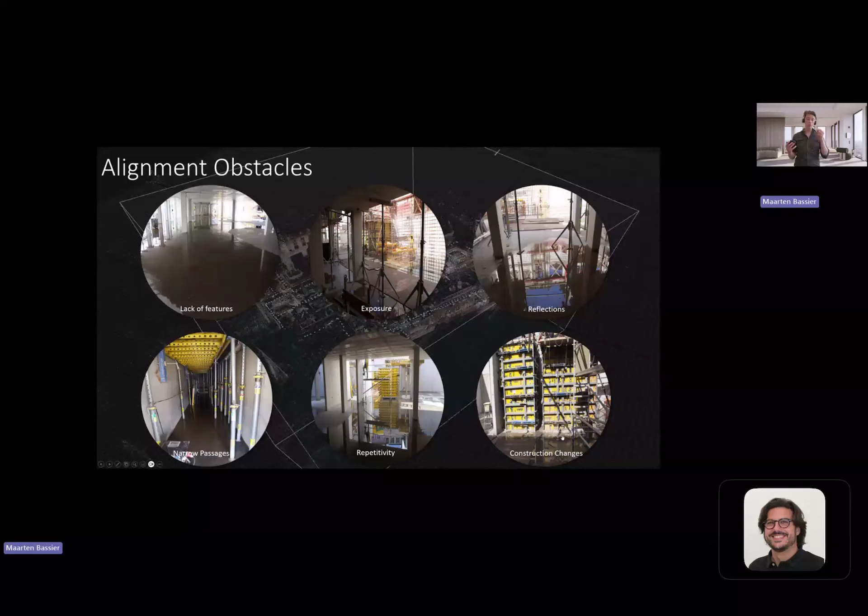Reflections is a major issue, both in TLS and structure from motion pipelines, as is narrow passages, repetitivity, and the construction changes itself. Currently, there are no commercial packages, for instance, like Reality Capture or Metashape, that can deal with these issues. More methodologies are needed, for instance, through Colmap deep learning features, in order to more reliably geolocate imagery on construction sites.

The second task focuses on the reconstruction accuracy, because we still see that both TLS and structure from motion pipelines struggle with reconstructing certain aspects on construction site.

Specifically, structure from motion pipelines struggle, as you can see here with this rebar field of a to-be poured concrete slab on a construction site. You see clearly holes in the reconstructed rebar field, which indicate that the depth estimation is not reliable. Furthermore, we see a 1 to 3 centimeter difference between TLS and structure from motion reconstructions, which can hamper tolerance control or tolerance estimations for certain elements.

Remaining obstacles include mixed edge pixels, or the deflection of a part of the laser beam or pixel, confusion of pixels near the side of objects, leading to erroneous depth estimation. This is a source of noise which can easily be confused while performing tolerance control of objects. It is specifically prevalent near corners or small ledges.

A second obstacle are reflections, mostly due to water. Both TLS and structure from motion pipelines struggle with this environment because it leads to ghosting data, or data that isn't there but still resembles the structure of the building surrounding it.

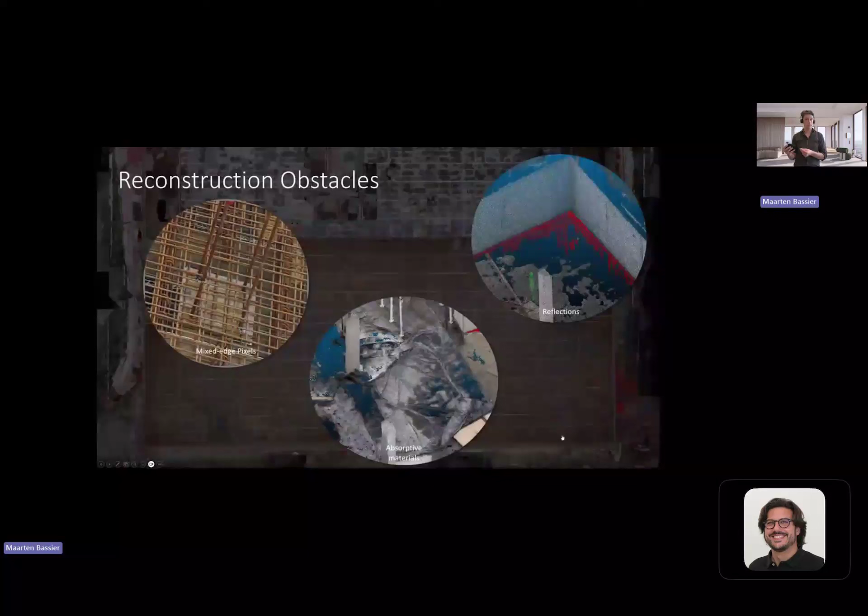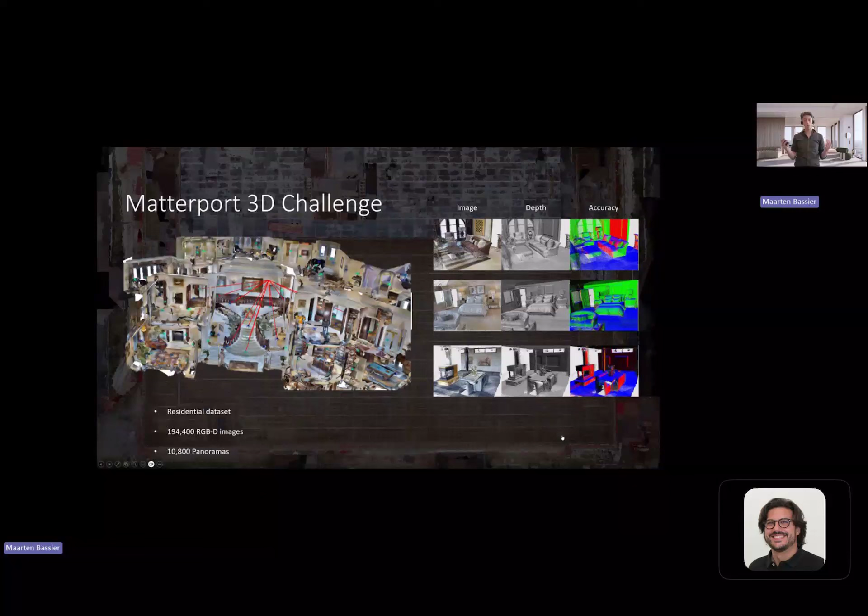Depth reconstruction is an extremely challenging task, which is the topic of ongoing research. In fact, this is not limited to construction sites, but is an overall challenge in the community. One of the key datasets used to advance depth estimation is the Matterport 3D challenge, which provides 194,400 RGB-D images to advance single-shot depth estimation or structure-from-motion depth estimation as a whole.

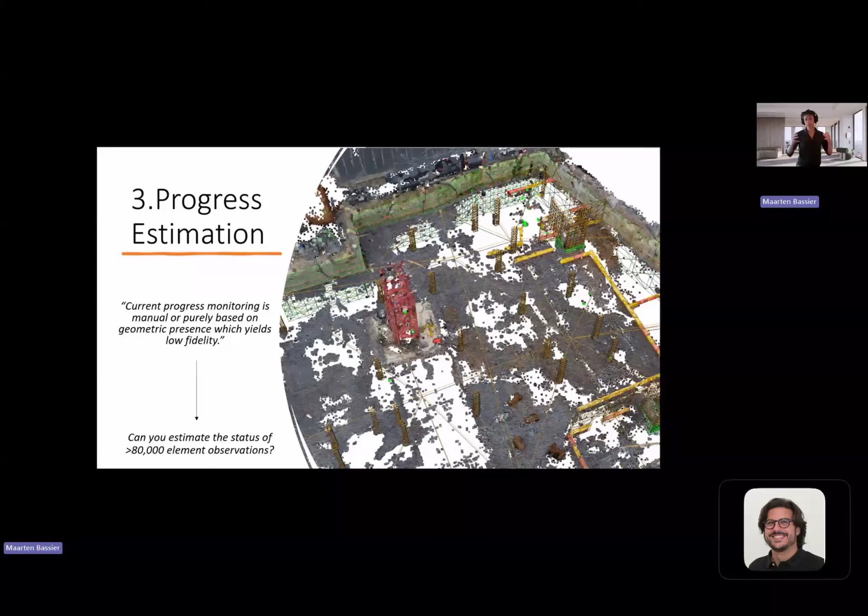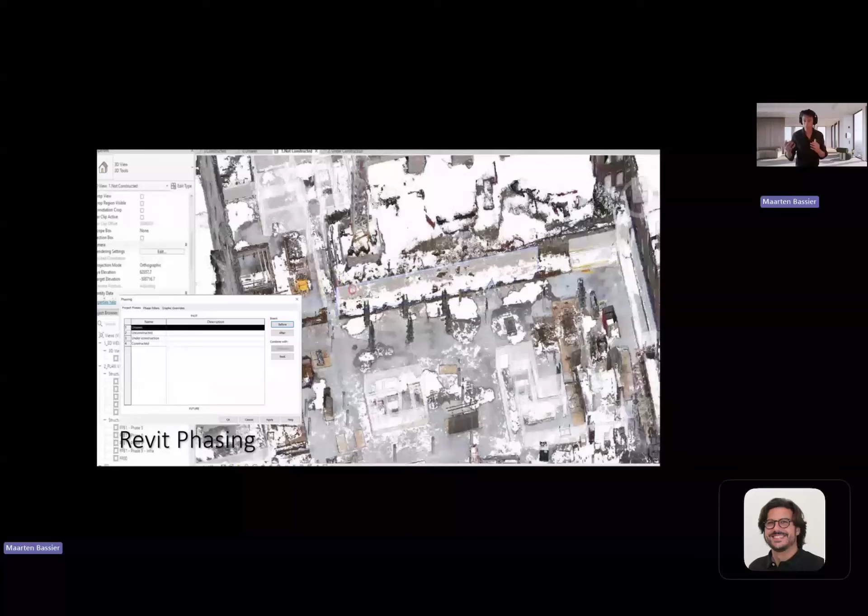The next task is progress estimation. In this task, we try to determine whether an object is built or not. Typically, this is a binary query where we only have two states, namely built or not built. However, we feel this can be more nuanced. On the construction site, it's often very relevant that we also identify intermediate stages, such as being under construction, and of course we also need an occluded state, which is unobserved. Based on these states in consecutive epochs, we can periodically assess the progression of each of these elements.

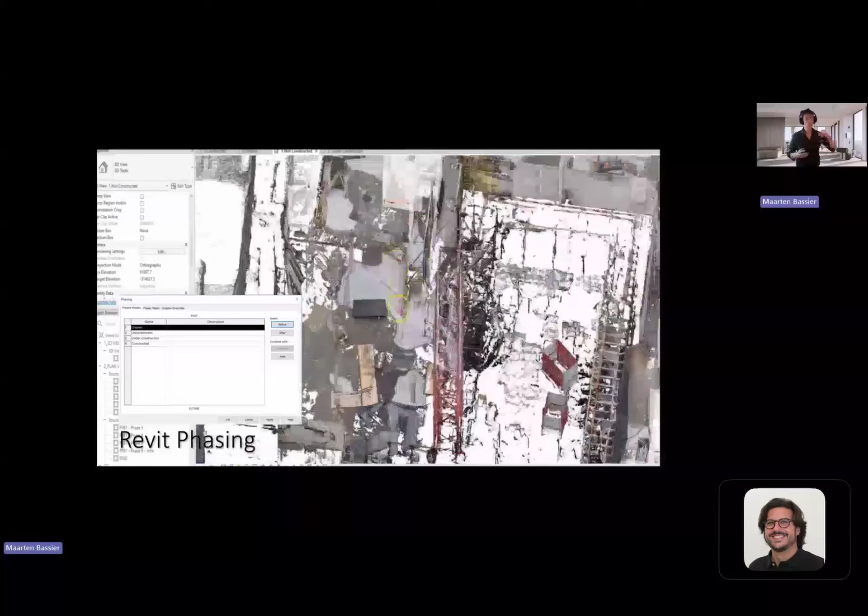Current state-of-the-art methods focus on the presence of points or pixels in the vicinity of an object. Unfortunately, this is not a very good estimator because there might be objects in place of that element, namely auxiliary materials like scaffolding or bulk materials, and also the progression states might give false positives.

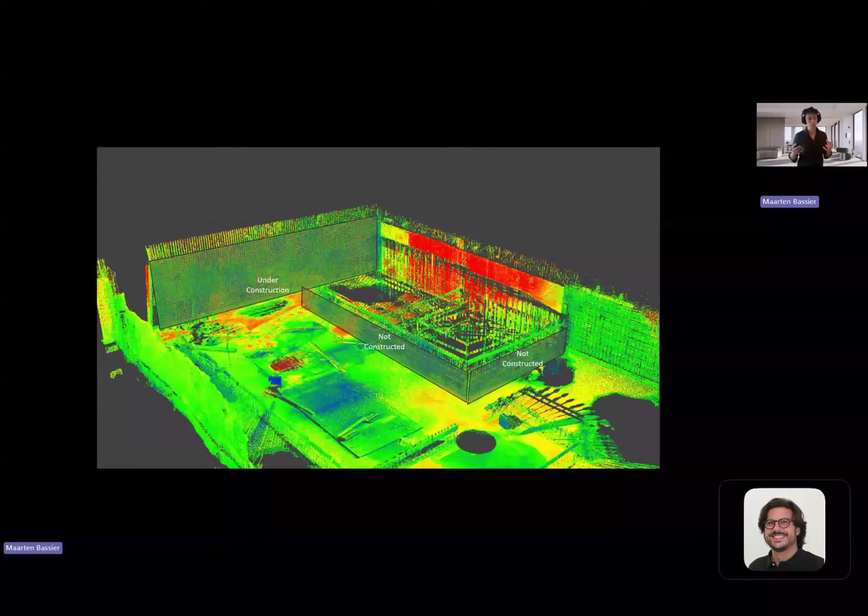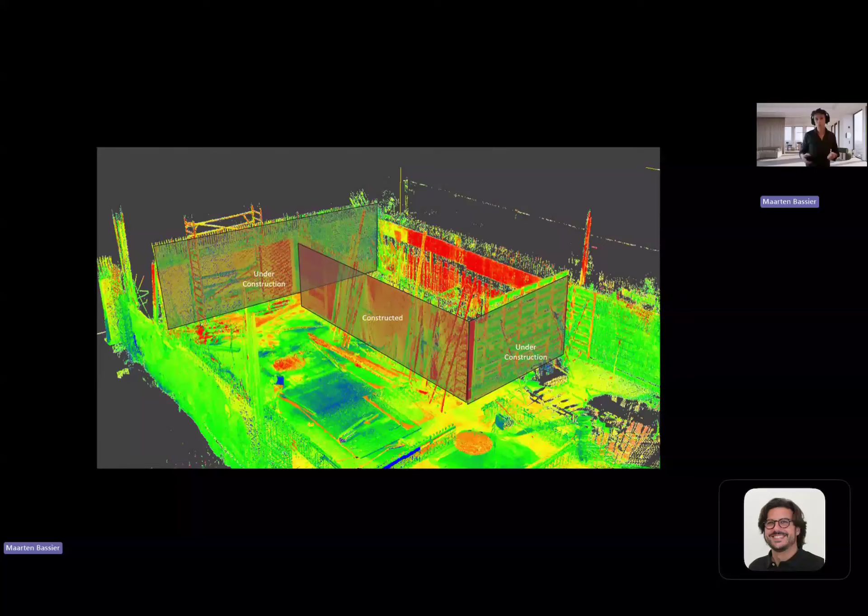So a binary search here is a little bit short-term thinking. We need a more elaborate system, and we need typically some deep learning methods to make a more nuanced choice of what the state of the actual object is.

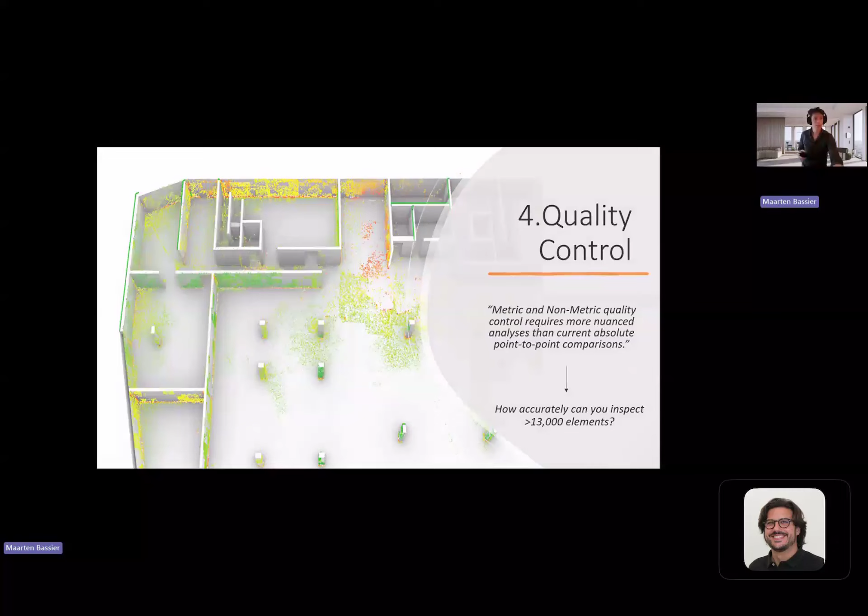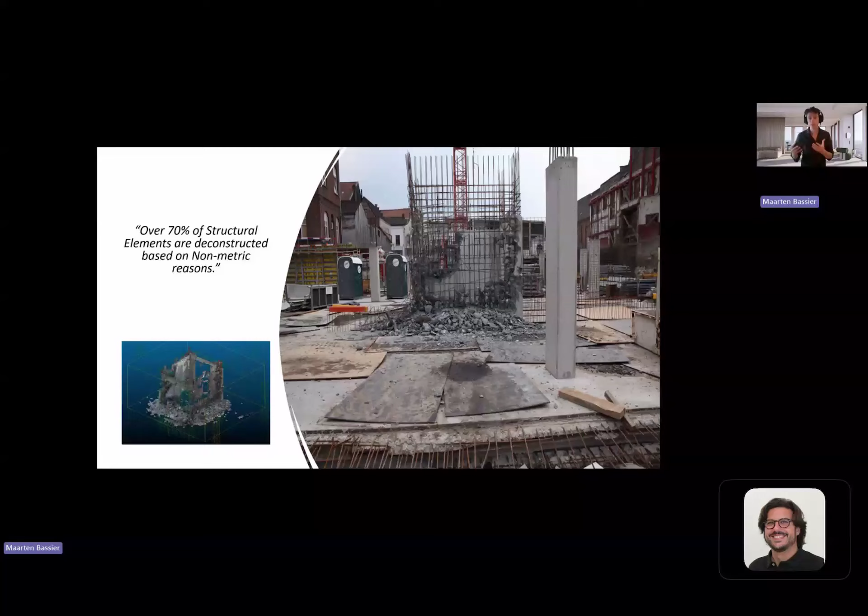Now, the next task is actually quality control, or the estimation of tolerances on site. Very importantly, this can be both metric and non-metric. For instance, a good example is that a number of construction elements, this wall, this elevator shaft here, contained by 4 walls on different stories, was actually demolished based on crocodile cracking in the wall surface. This was very hard to detect from a metric stance, but could be very easily identified in the images. So this was not an improper placement, but rather a visual defect of the element.

Now, if we talk about tolerance control, we have to talk about coverage, because often we won't see 100% of the element. In fact, due to the occlusions of the connections between different elements, seeing 100% of an element is virtually impossible. Now, how much do we see of an element?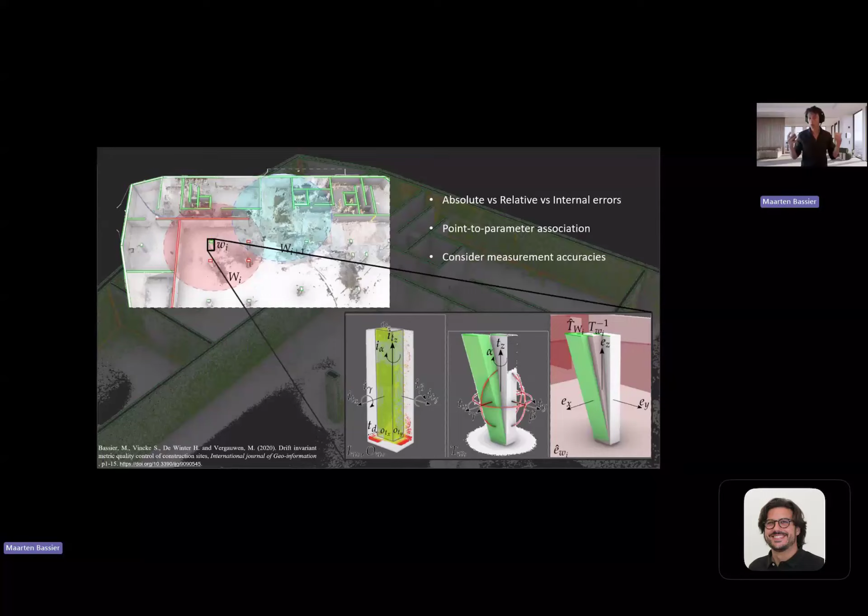Well, of a floor slab, that might only be close to 40 or 30%, because some of the top is occluded by elements standing on it, and the bottom side of the slab might not be visible at all. So based on this 30%, we still have to estimate whether that floor is constructed up to its standard or not. And so this coverage should be a metric that should be reported on top of the tolerance control.

Now, what we propose is not simply stating whether an object is within or out of tolerance, but actually trying to report the best fit transformation from an object to its observed location, which we found is much more resilient against occlusions of that element. In fact, the parameters that we're trying to fit here are the translation in X, Y, and Z direction, but also the rotation around Z, Y, and X.

One final aspect is, of course, the absolute versus the relative or internal errors. Those are three different errors, but in an observation, we will observe all three at the same time. To give you an idea, an absolute error is your positioning error compared to the GNSS measurement. That might be an absolute error in latitude and longitude of your full construction being shifted to the left or the right. In a classical tolerance control, if you perform an absolute distance measurement, that would immediately put your entire building out of tolerance. But of course, in reality, this is not the case. So we need to separate the absolute errors from the relative ones, namely the distance of a hallway, the width of a door is a relative error.

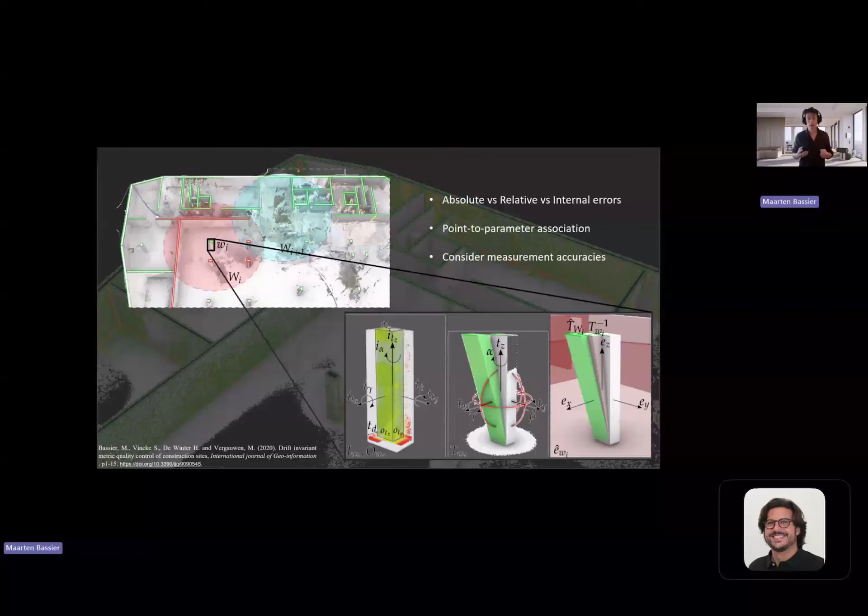The fifth task that needs to be performed on construction sites has to do with detection, more specifically with semantic segmentation. That is the labeling of every point and/or pixel captured on the construction site and assigning it to a certain class and/or instance. If we talk about class assignment, we talk about semantic segmentation. If we talk about object assignment, namely the object ID, we talk about instance segmentation.

Now, current benchmarks acquire around 70 or 80% after a while, when enough researchers have proposed methods to solve this labeling task. However, we see a large drop-off when we translate those methods to real-world data. Even more, when we try to use a method from another benchmark on this data that we have right here, we see that there are a lot of incompatibilities due to the domain transfer between, let's say, scans of the interior of buildings compared to construction sites.

They are very different scenes, and we have noticed that detection methods that work very well indoors don't work well with construction sites that have both indoor and outdoor spaces, and the same can be said for outdoor methods that don't translate due to the differences between indoor and outdoor data sets. Also, the construction operations themselves are quite unique, and methods tend to not handle those situations very well.

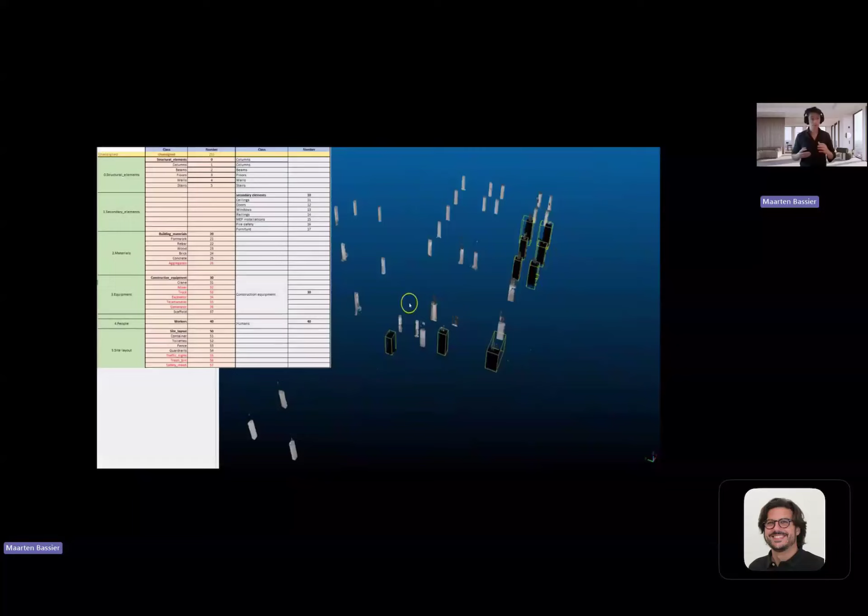Here we see an overview of one of the point clouds that is being labeled. So here you see a depiction of the BIM in green in Cloud Compare, where we see a classification of all of the columns. Now, it is important to notice that a lot of the classes that are detected on construction sites are in fact not part of the construction themselves. In fact, if we focus only on the structural elements, the primary and then the secondary elements, this will constitute only about 10 or 15 classes, which is very reasonable for a detection task.

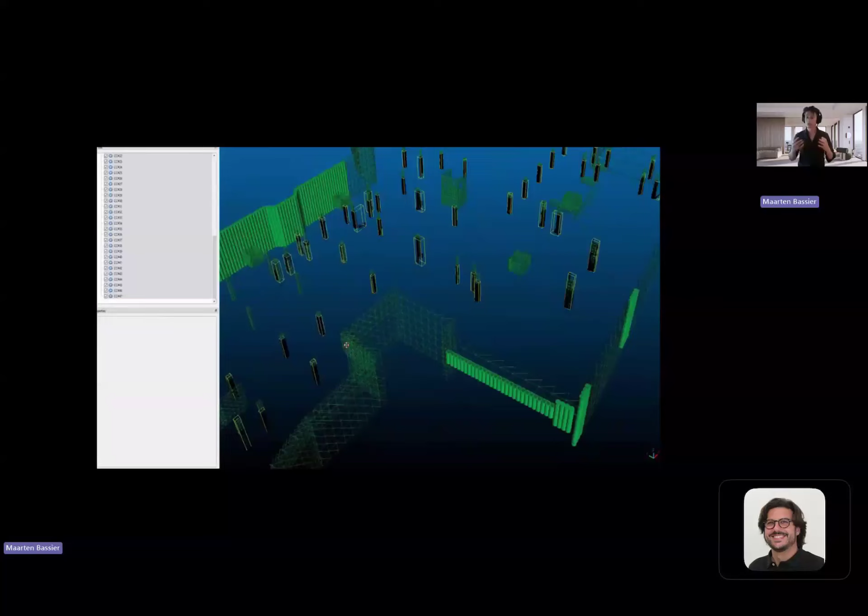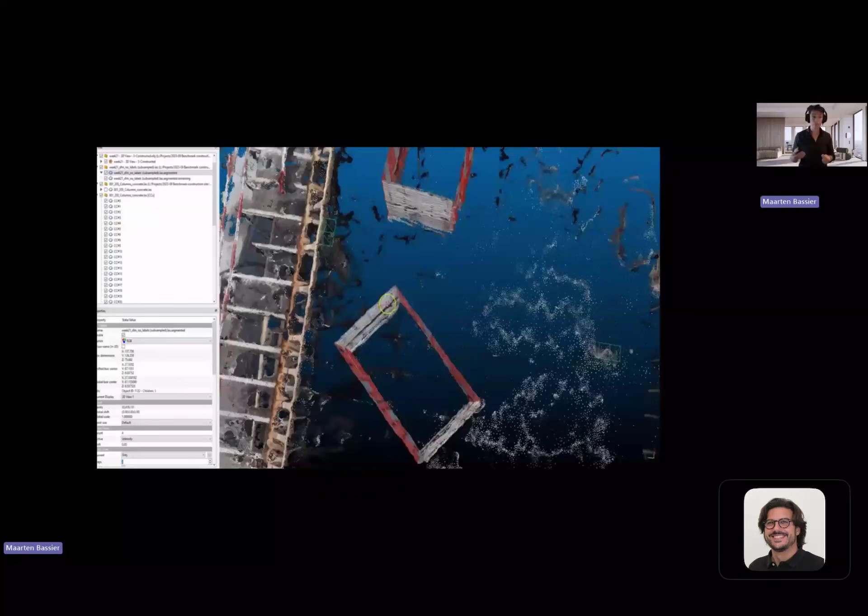However, we have a lot of classes, such as you saw in the Excel list just before, that have to do with material detection or safety equipment or tracking of vehicles on the site, which is very relevant for construction management, but have little to do with the final building itself.

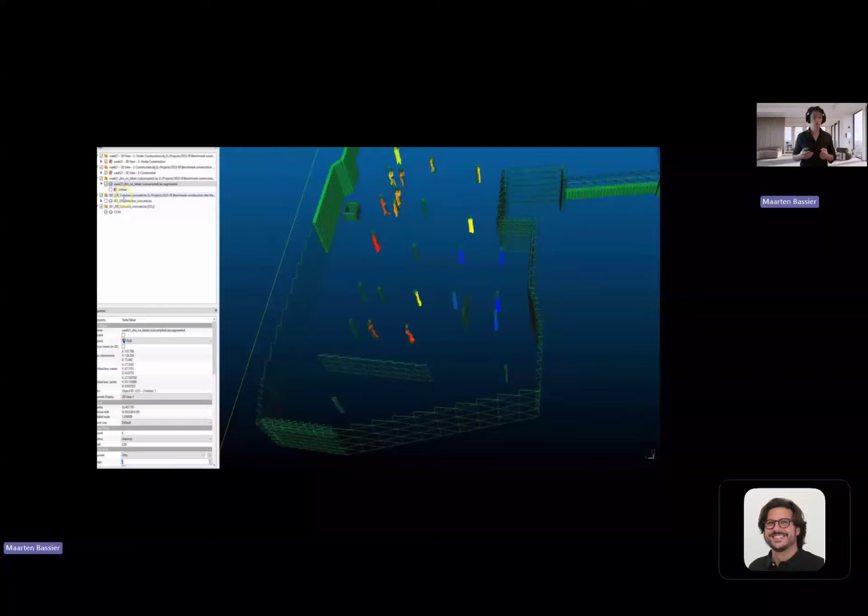Unfortunately, if we take a look at a data set, actually the majority of points and pixels do not belong to the actual building. But to avoid any false positives, it is important that the detection mechanism knows how to deal with those instances and maybe even detect them so they can be used for construction management.

Here we see a depiction of what a label production would look like for one of the epochs of the KU Leuven construction site. In fact, we provide multiple labels for construction management and researchers to develop systems on, namely first of all the segmentation labels, which are the class labels, for instance wall, ceiling, floor.

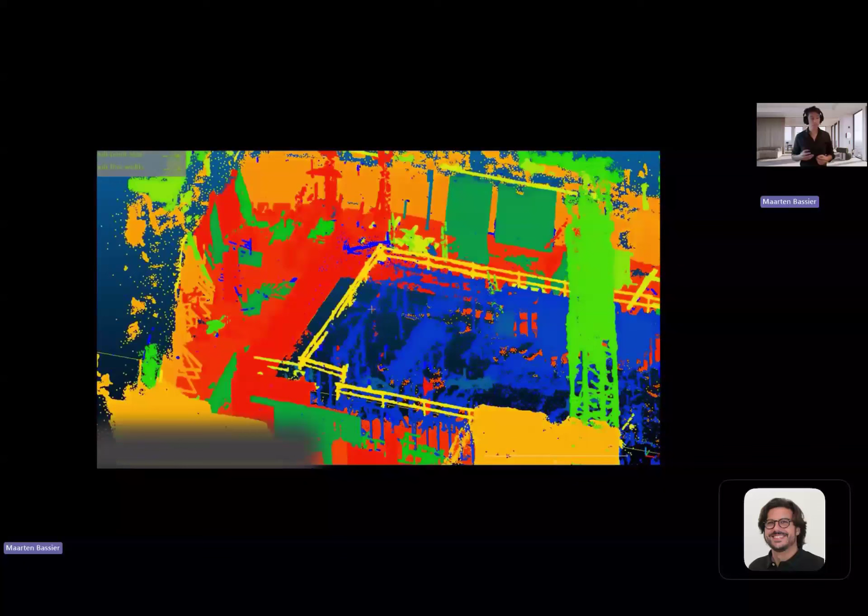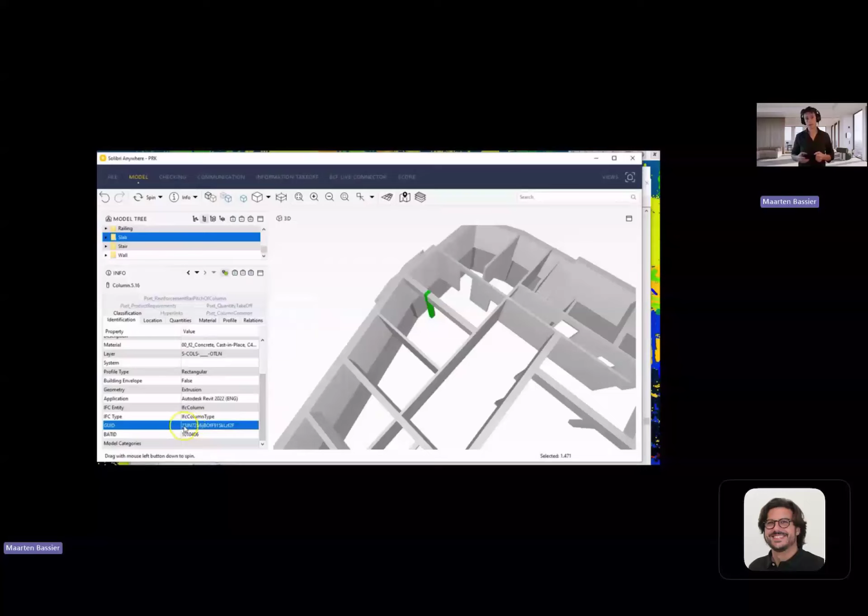Followed by a material and status label, namely whether they are concrete or steel or cement, followed by a progression label, whether they are constructed or unconstructed, and followed by their object label, which is tied to the IFC GUID, a unique identifier for every object present in the IFC model and the Revit models. So we have aligned very nicely the BIM models with all of the semantics, with the point cloud data, and then also with the image pixels.

That brings us to the final task, namely the object detection. This is purely based on the initial segmentation labels and constitutes the retrieval of bounding boxes of certain objects. You might argue whether this task is necessary or not, because you already have a segmentation task, but we argue that it is very important to make the distinction between the two.

When we talk about segmentation, this is a fine retrieval of observations that you can use for tolerance control, where it really matters whether a pixel belongs or doesn't belong to a certain object. However, a lot of objects do not need this very high quality segmentation.

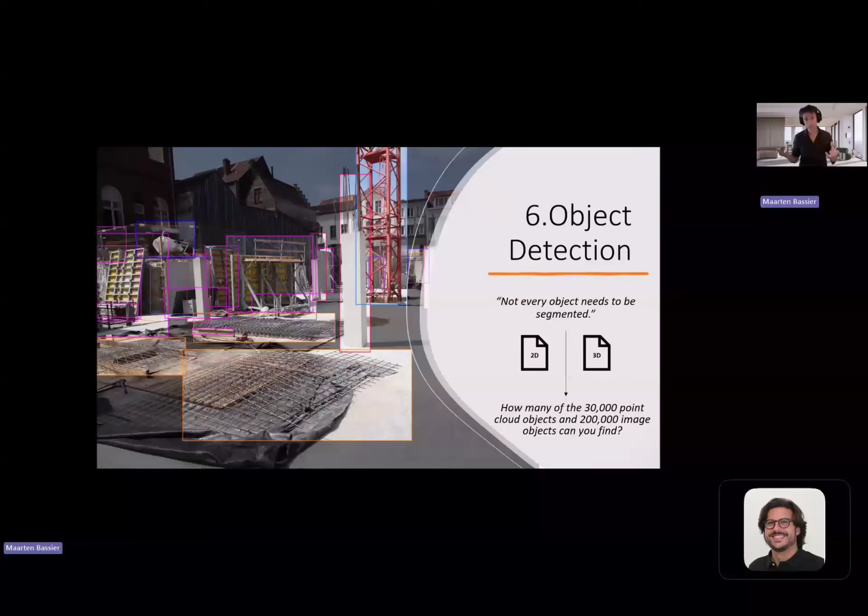In fact, most objects on site, like an excavator, need to be tracked very roughly. Once we know its pose more or less, that already gives sufficient information to construction management to do something with that. So the last task we need to perform is an object detection task in the points and the pixels to retrieve certain objects.

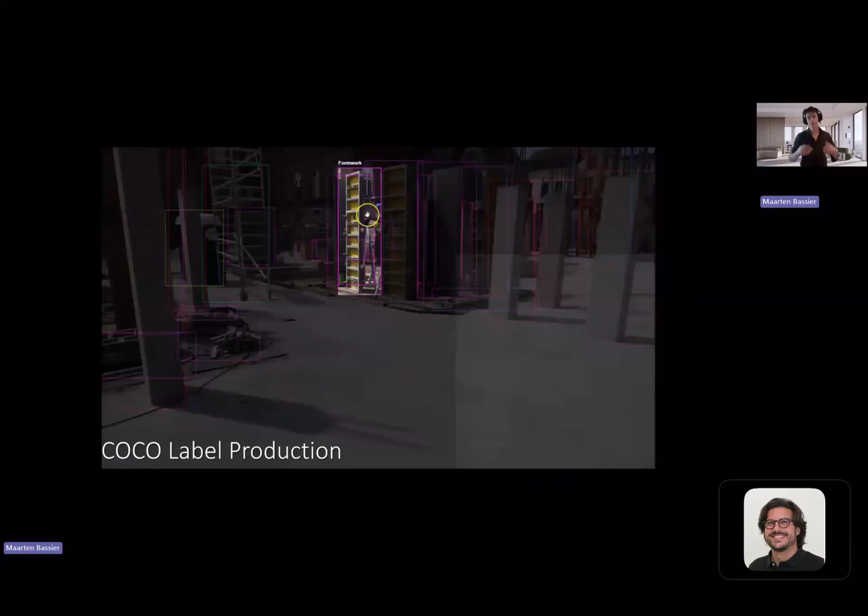Now, as you can see, there are many different bounding boxes to be found in every image. These can, of course, be automatically generated from the segmentation and are again tied to all of the IFC GUIDs. And to make it very clear, we have produced this in the COCO label format.

Now to conclude, we have also written an API called GEOMAPI, a toolbox that processes both BIM data, structure from motion data, so imagery, geolocated imagery, and point cloud data, even mesh data, and treats it as homogeneous assets. You can query them as if there is no difference between all of these entities, so it is very intuitive to work jointly with BIM data, mesh data, imagery, and point cloud data.

Now, the primary task of this toolbox is to facilitate the processing, which is currently very unique still for every format, for every data representation. Moreover, we aim to limit the search space which we have to occupy to find a certain element. Because we are tracking a lot of data, we saw the data being captured before throughout 17 epochs, we generate so much data that it will become infeasible on construction sites to efficiently retrieve observations of a certain object.

Imagine that you want to retrieve an object in epoch 14 in a certain story of your building, then you don't want to evaluate every single image and point cloud that was captured on that site. Instead, you want a specific date and only the points and pixels in that vicinity, and that requires that we store metadata of every data representation and file format.

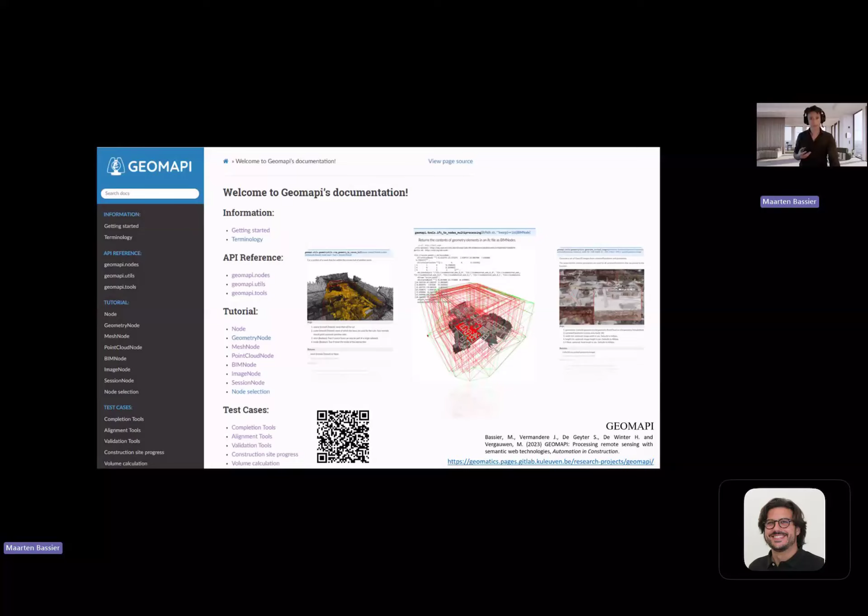You see the link here. I invite you all to go take a look at the website. It is currently being maintained by our PhD researchers, and together with the online benchmark will be published in the future. Actually, the API is open source already, but the benchmark is still under production with the 6 unique tasks.

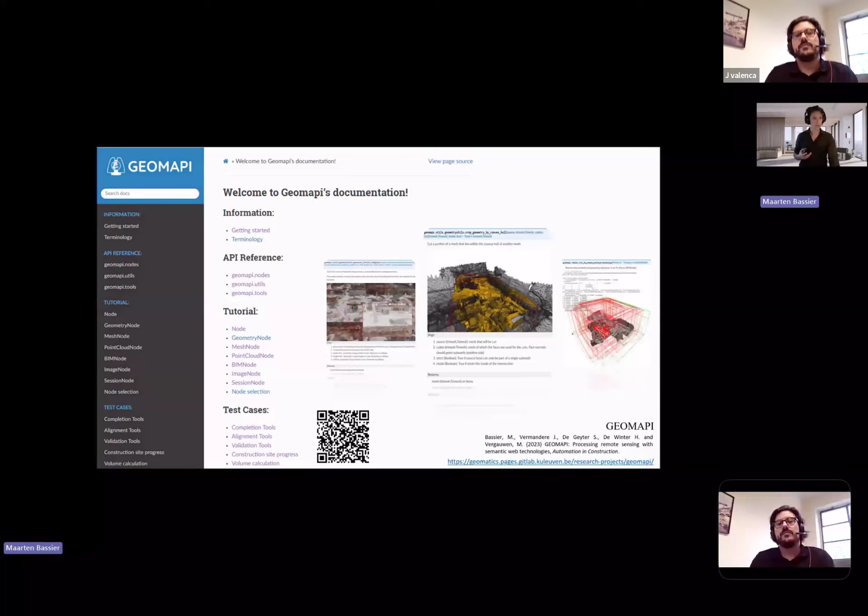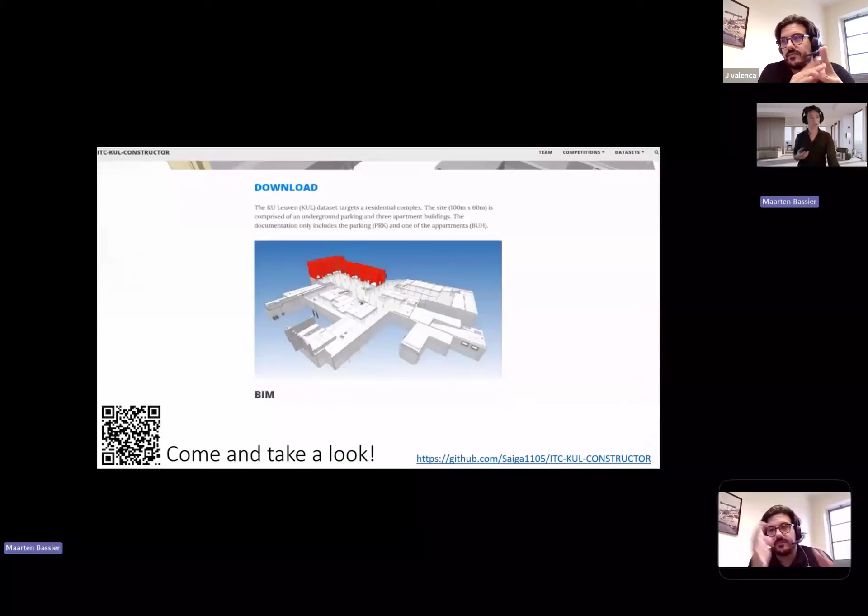We will provide detailed information on how to process information to facilitate researchers developing methods, but it can obviously also be used by industry professionals to come and take a look at the data and how maybe they should capture or process their own construction sites.

Thank you very much.